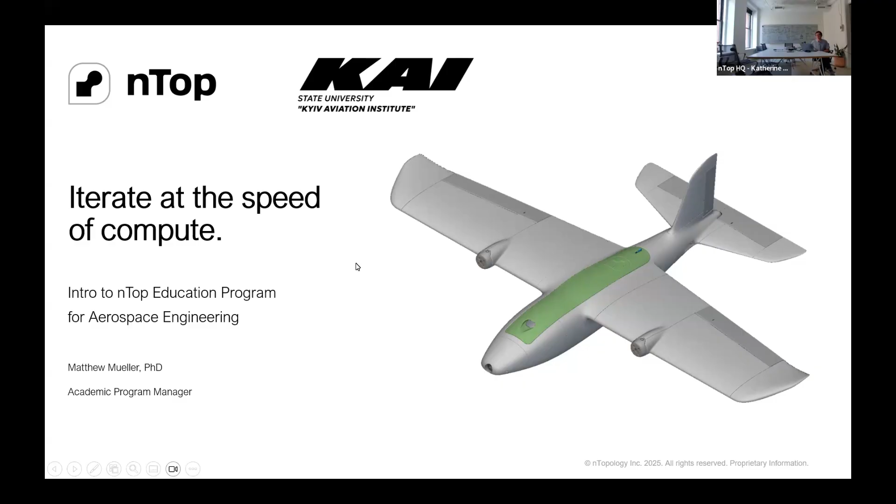I'll start by giving a general overview of nTop, our company, and what problems we're solving. Then I'll dive into technology differentiators, looking back a bit at the state of the art for the CAD industry today, and dive into some use cases. We'll go through conceptual design, multidisciplinary analysis and optimization, and inverse design, then hone in on detailed design and talk about our flow analysis capabilities. We'll end by talking about our integrations, how we fit into the broader spectrum of other CAD tools and computer-aided engineering tools. Again, lots of time for questions.

So who are we and what problems do we solve? In general, we're seeing that the aerospace industry is being pressured to innovate faster, at the same time as the requirements for their designs are getting stricter and more intense. From an education perspective, students need to keep up to be able to get these jobs and join industry immediately. What we're hearing from customers is programs that used to be 5+ years are being condensed into 18 months, and we're seeing a similar trend across the industry.

I picked out a couple of recent quotes just about the high stakes aerospace and defense environment and how speed is really imperative, especially with increasing amounts of competition and fast changing needs, as you very well know, in Ukraine. Of course, technology is changing this. There are new AI technologies and modernizing systems that are helping to drive this accelerating pace of change.

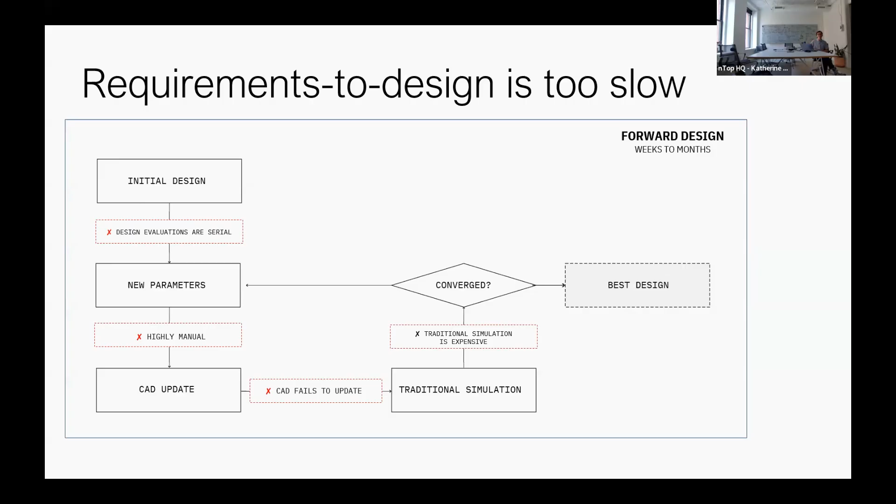Then traditional simulation is very expensive, both computationally expensive and just in terms of the amount of time it takes. It's all a very long, arduous process. So that's one of the key things that nTop is trying to solve in the industry.

The two key bottlenecks that we've identified in terms of design challenges, particularly for advanced aircraft design, are geometry and simulation. Traditional parametric updates are slow and often break your geometry, causing you to go back, and your automation process just can't run efficiently if you're spending so much time fixing broken geometry. Then, of course, with simulation, each time you make that geometry update, it's a very arduous process preparing the geometry for analysis and meshing, making sure all of the parts of your geometry are correctly labeled and differentiated.

So our goal is to help make higher fidelity models for both geometry and simulation, and do them in a more robust way and faster.

So who is nTop? We were founded about 10 years ago, and our goal is to remove barriers to optimization, lower the cost of revision, and increase the speed of your iterations. You can see logos of just some of our customers, and the aerospace industry is definitely one of our key industries here. All of the aerospace primes in the US are nTop customers, and we're constantly working to increase their usage and help them leverage nTop across their design cycles. Generally, we're used for highly engineered designs where iteration is key.

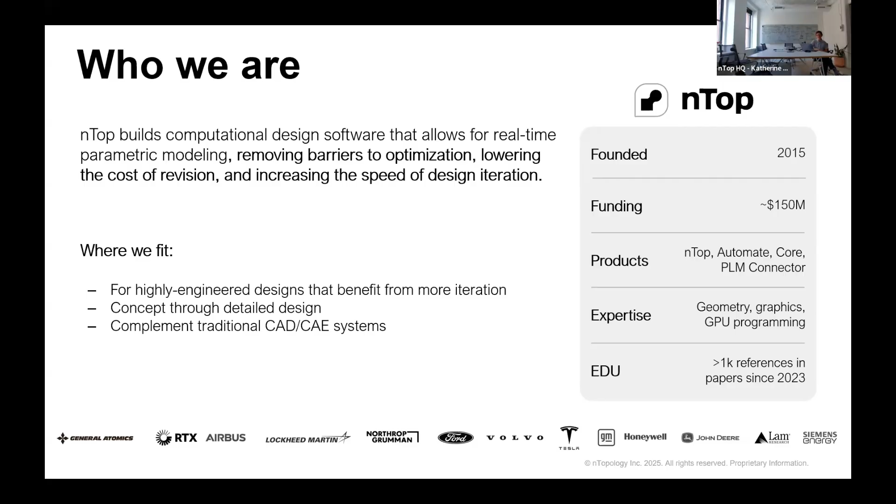And we fit from conceptual design at the earliest stages all the way through to detailed design, topology optimization. We're really meant to complement existing or traditional CAD and CAE systems. We're not going to replace all of your tools and be your full end-to-end solution, but we really augment your capabilities across your design space.

In terms of the education mission, we have thousands of monthly active users using our free education license. Why do we give away free licenses for education users? Two of our main goals here: one is to pay it forward, it's the right thing to do. We want to help the next generation of students and researchers learn with the best, most modern, advanced engineering software tools. So that's why we want to give it away for free.

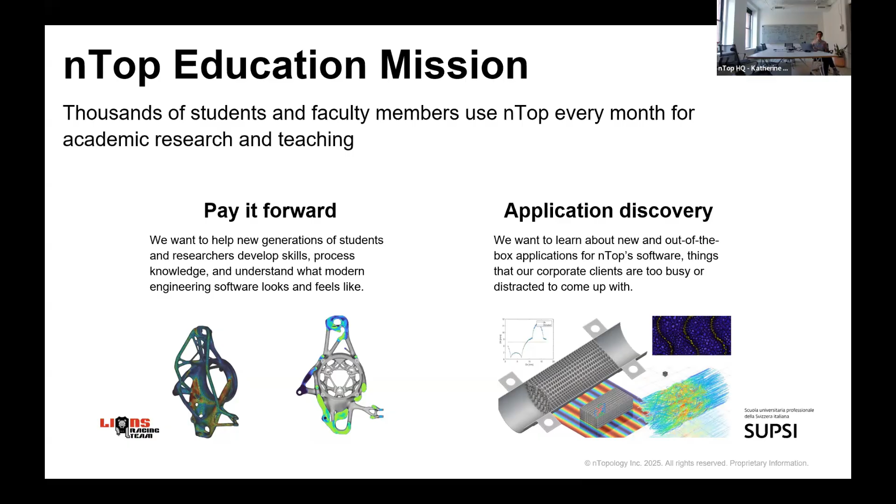But it also helps with application discovery. A lot of our corporate clients are too busy or bogged down in too many mission or business critical requirements to explore the out-of-the-box application. So we've seen a lot of really exciting stuff coming out of academia that helps us make a better product and helps our customers understand what they can do with nTop. Of course, this also cultivates that kind of business pipeline for us. We want students to go into industry and bring these skills using nTop and say you should buy more licenses. But really, we want to pay it forward and help accelerate application discovery.

So as mentioned, we provide free academic licenses. You could go to ntop.com/education, fill out the form. We process the license requests every day, Monday to Friday. Then we also have a full learning website, learn.ntop.com, with self-paced courses that you can take. We have support.ntop.com with lots of knowledge articles, frequently asked questions to help you get started. And then we also have a Discord server for our education community with over 1,000 members and growing strong every week, where the community engages with each other, shares cool updates, research, but also asks questions and gets help there.

So that's nTop. Now let's dive a little bit into our technology, and specifically focus on implicit modeling and computational design. So we have three main pillars of our technology differentiators.

Implicit modeling, which is a new approach to creating geometry that's different from traditional boundary representation, which is kind of the status quo for traditional CAD. It provides fast and reliable modeling, and you can use flexible field-driven parameterizations to create your geometry. And importantly, it leverages modern compute hardware. So traditional CAD is locked to the CPU, which is a serial, computationally expensive, slow process, but implicit modeling really leverages the GPU and multiprocessing.

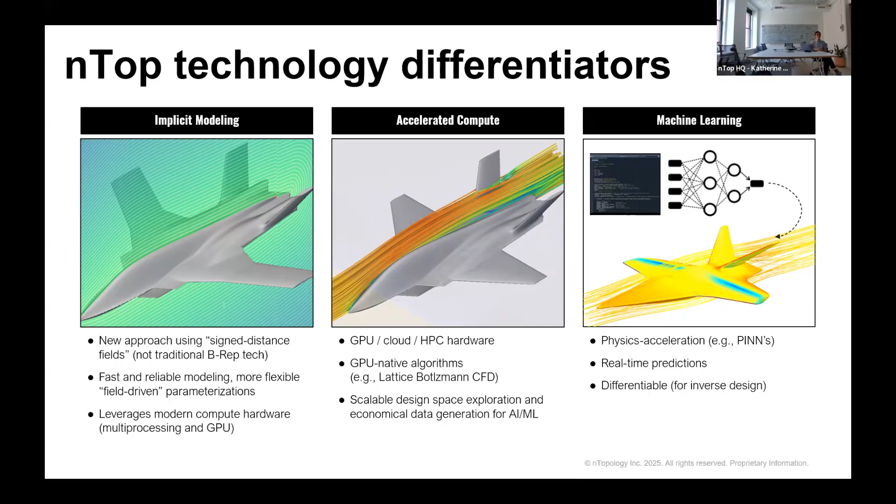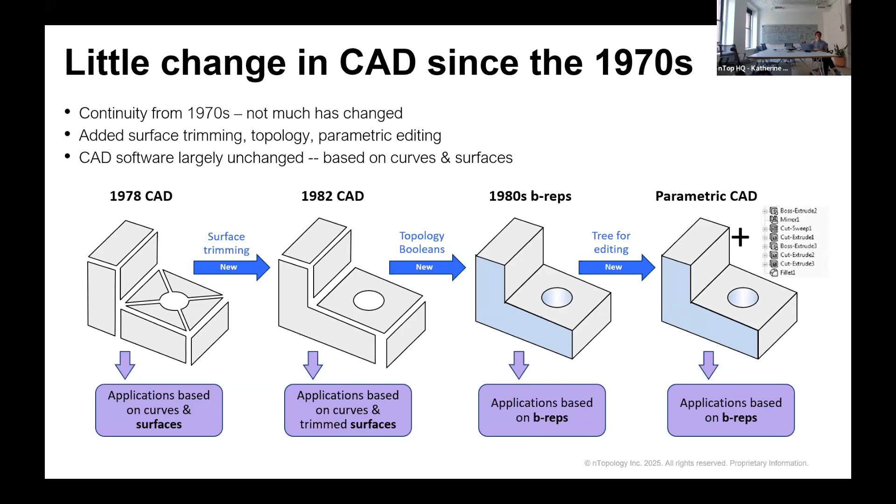So let's take a look back a little bit at the CAD industry and why implicit modeling is so revolutionary and important today. So from the 1970s, when the initial CAD ideas came out of MIT, little has changed. They've evolved, and we've gotten to kind of the traditional parametric feature-based CAD systems that we know and love today. And it's constantly evolving and growing, but it's pretty similar core technology to what we had in the 70s.

And some of the key weaknesses: one is that it's fragile and unreliable. So as I mentioned, if your fillet intersects and the number of edges changes, if your fillet's too big, you typically need to do some manual intervention to solve that, which is, if you're trying to do a design of experiments, a very manual, tedious process.

The data itself is very big with poor scalability. Each edge needs a precise definition, each surface needs a precise definition. So there's NURBs everywhere. And as I mentioned, it's just kind of based on old compute hardware and slow. It's not GPU friendly to have to compute every individual edge and face of geometry.

Implicit modeling, on the other hand, is creating geometry just with mathematical equations. There's no fragile calculations that you need to do. Your topological modifications just work with the math. The data size is very small because we're using a concept of signed distance fields to actually define your geometry.

Rather than defining your edges and faces, we just evaluate your mathematical expression at x, y, z. If the value is negative, that's geometry. If it's positive, that's not geometry. But those fields can be flexibly used in many other ways, so it's a very scalable and efficient way of defining our geometry.

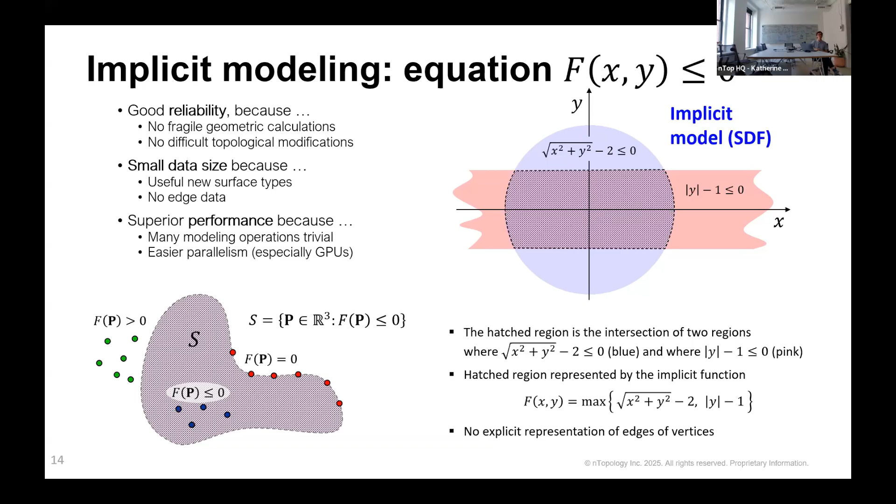So why do we need something new? What parts of these kind of industry-wide transformations are driving this need? The first is digital manufacturing. Additive manufacturing technologies have come a long way, which makes complex parts much more desired and easier to manufacture.

So as your part complexity grows, as your lattices get more complicated, it's hard to scale that on traditional CAD systems, which means more chance for geometry errors, more scalability problems. This also allows us to manufacture with non-uniform materials with either lattice infills or multi-material type applications. And BREP alone is not sufficient for defining those types of non-uniform material properties.

Computational design and just the algorithms on how we are designing are always improving, and it's program-driven, not human-driven. So we can now encode your conceptual models with your implicit modeling technology. And again, back to that computing hardware, we've come a long way since the CPUs of the 1980s, and implicit modeling is really the way to leverage that.

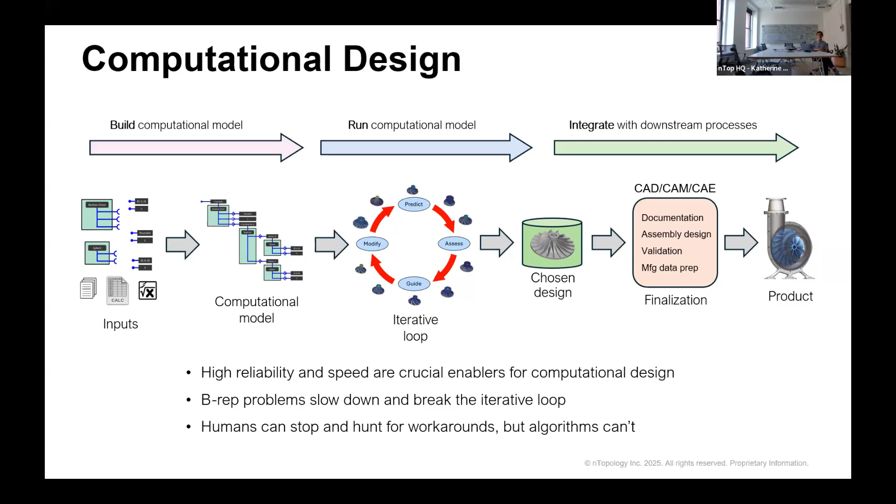So diving into our first real use case for aerospace engineering in particular is conceptual design. Maybe I'll come up for air quickly, look in the chat. Any questions or anything so far?

Yes, Vadim. Yeah, Matthew, I have a question regarding implicit modeling. Can you just explain? You mentioned that you define the mathematical equations that are not actually defining the border, but defining the field where the geometry is inside. But what about the complex boundaries? Do you still use splines or other ways to define this geometry? What is the process of that? Can you comment on that?

Yeah, so the edge of your implicit model is the zero plane of your signed distance field. So this is maybe a reason to just quickly come in and introduce nTop, the product.

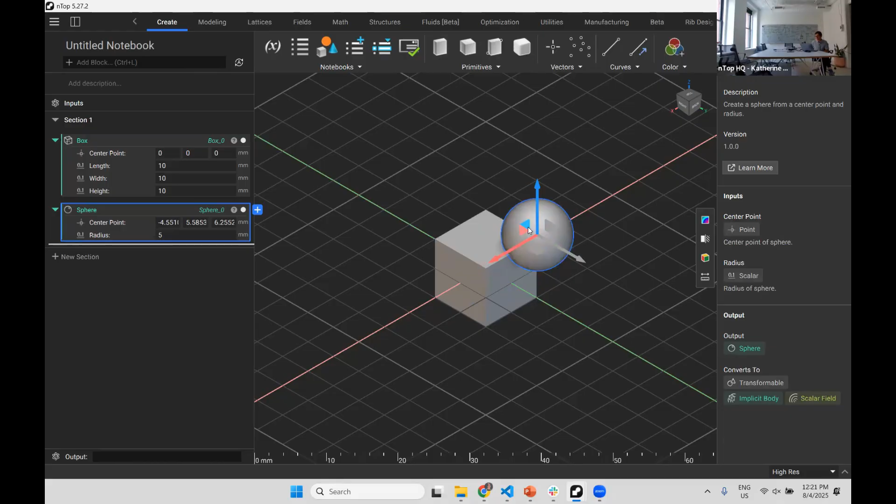So this is what an nTop notebook looks like when you start a new model. You can add a primitive. So I'll add a box and I'll add a sphere. One of our favorite models is the sphere cube. So here we can click on the box, we can click on F, which is your field viewer, then I can turn off the visibility.

And here we can see the signed distance field that the box generates. Inside of the box is your negative, and outside of the box is positive. So it's that zero plane which defines your geometry.

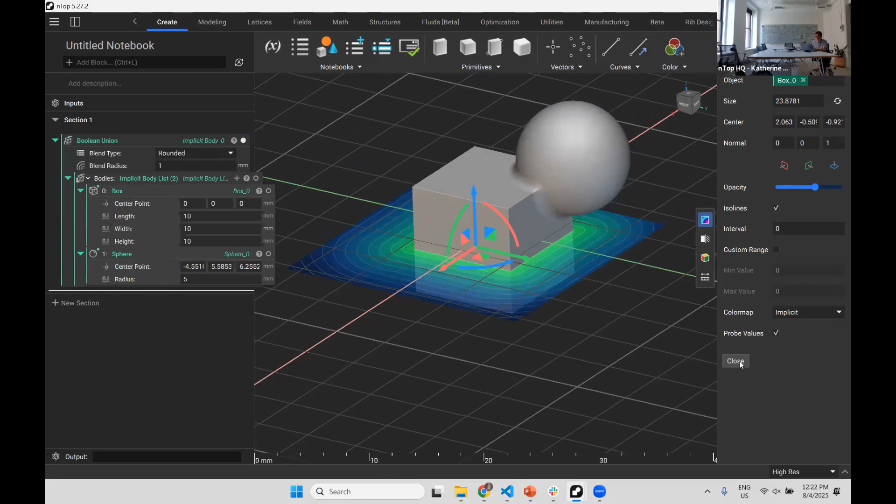Just to go a little bit further here, maybe I'll do a Boolean union and put these two bodies together. And maybe I'll add a blend radius there. Blend radii are very powerful. And here you can see we now have an updated signed distance field, which if I hide this again, that zero plane of our signed distance field is what defines our geometry.

You can use splines and various curves to help define your geometry, and those splines are driven by their equations.

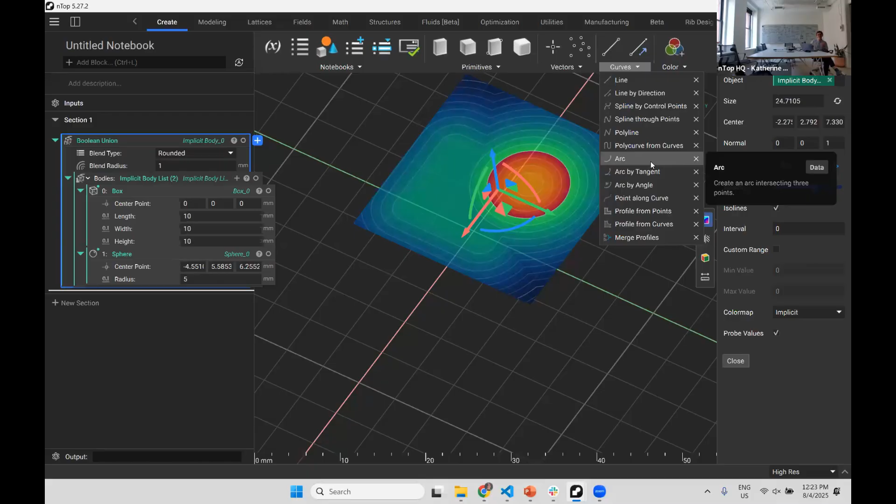But if you're creating just an implicit body, we don't necessarily have a curve that defines the intersection of where this fillet radius changes, if that makes sense. At the end, I'll talk about how you can then convert your implicit body to a BREP body for integration with your CAD systems. But that is sometimes one of the difficult parts, going from an implicit body to a CAD body.

Yeah, Matthew, thank you. This makes sense. Yeah, thanks. Of course. And I'll come back and do some more demos later on. Any other questions before I keep going? Okay, I'll take silence as a good sign.

So conceptual design is one of the main use cases that nTop is really targeting now for many reasons. One is because the further in your design process you go before you realize that you're not actually on an optimal design path, the greater the costs of revision. So if we can help companies and product designers converge on that optimal solution as early as possible in their conceptual design phase, we can help save a lot of money for revisions down the road as they've gotten farther along in their detailed design process.

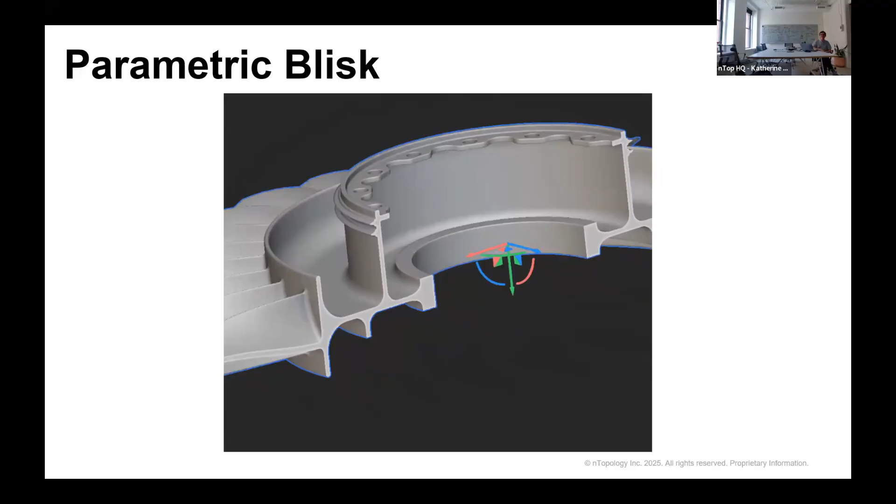This parameterized blisk, you can see, no other CAD system. You can see these updates in real time as you're dragging a slider. And I can demo this file later, but as you can see, all of these parameters using our GPU acceleration, you can see the updates in real time. They're super robust. So you could do that design space exploration in an automated way without worrying your geometry is going to break at some point.

Similarly, with fuselages for aircraft, you can use these equation-driven methods and parameterization techniques to explore all of your design space early on to make sure that you're choosing the optimal design before you get into the detail parts.

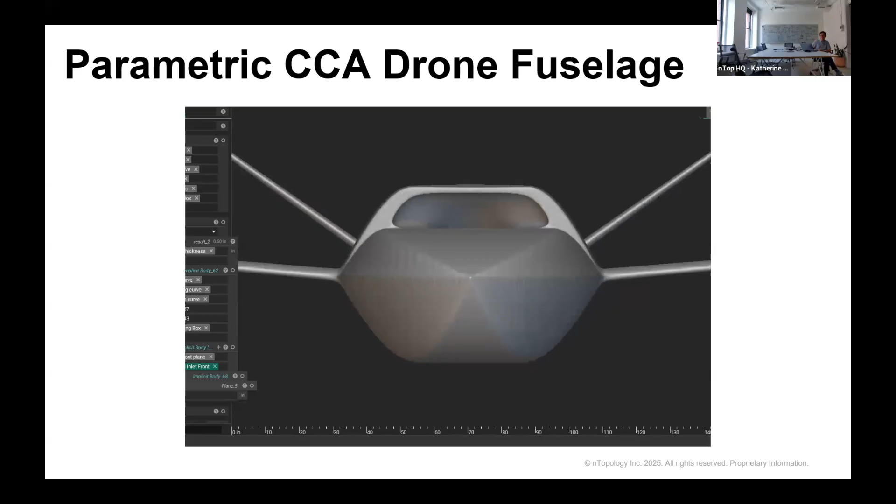Matthew, may I ask you, when I make some transformation due to the sliding, what main characteristics are taken into account? For example, it could be aerodynamic, it could be strength, or it will be a combination of both of them. So how may I determine what I need for transformation as a key parameter?

Yeah, so it all depends on how you set up your model. These are the parameters that control the geometry, but your analysis and your requirements that are driving your design can be baked into it in any number of ways. So you can write your equations in the notebook on the left. So one thing I like to say is, don't think of the notebook on the left like a parametric feature tree, as you would see in a traditional CAD system. Think of it like a Python notebook, like a Jupyter notebook. You can have all of your equations baked in here, and it's a functional programming language. So you can refer and use different aspects of your notebook at any point above or below. The order doesn't matter.

So if you have your lift to drag nominal equation encoded in your notebook, you can use that to drive the ratio of your wingspan to your fuselage blend. I'm making stuff up, I'm not an aerospace engineer, but that's an example of how you can build that kind of nominal physics-driven analysis into your notebook.

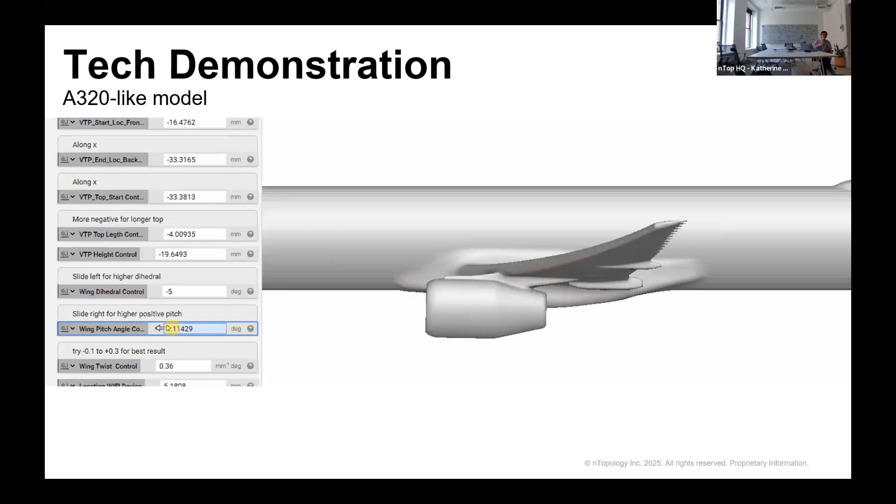Of course, you can also run stress analyses, flow analyses on your geometry. And then in terms of closing the loop and doing that optimization, that's a very specific kind of problem and depends on your specifics. We're actively working on integrating more optimization algorithms into nTop, so you'll be able to do all of those types of workflows directly in your notebook. Currently, we have field-driven optimization or topology optimization built in, but we're moving towards more multidisciplinary optimization type problems where you have that trade-off between stress and lift, for example.

So these examples are really just showing the robustness of our implicit modeling technology. With a full A320-like model, you can see how easy it is to explore all of these different shapes using those field-driven modeling capabilities. Okay, thank you.

Yeah, Vadim? Yeah, Matthew, if I understand correctly, those sliders are user-defined, right? So the user can create these sliders for their model, and in that case, what computational engine is in use? Do you have an API for Python, or do I have to define all these equations inside nTop? Yeah, great question. The parameters are defined in your notebook, so you need to come up with your own mathematical equations to define the geometry. We're working on other, more computational interfaces for generating the notebooks themselves, but as of today, you have to define that in the notebook.

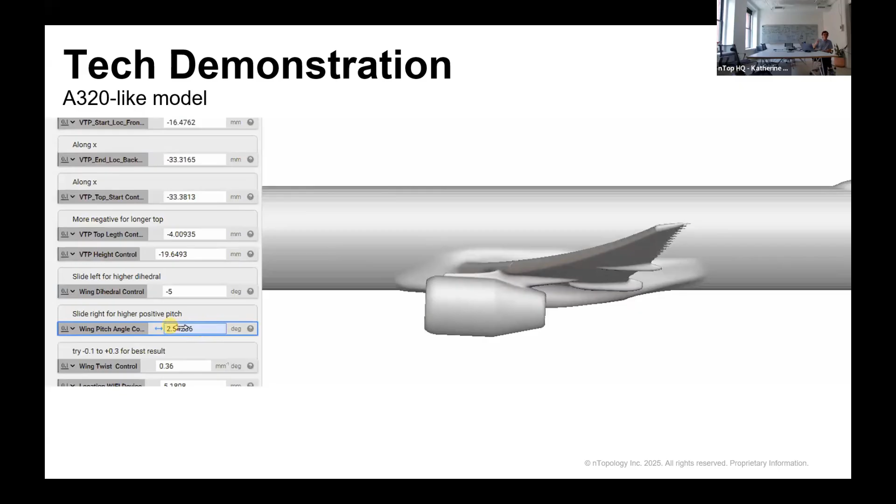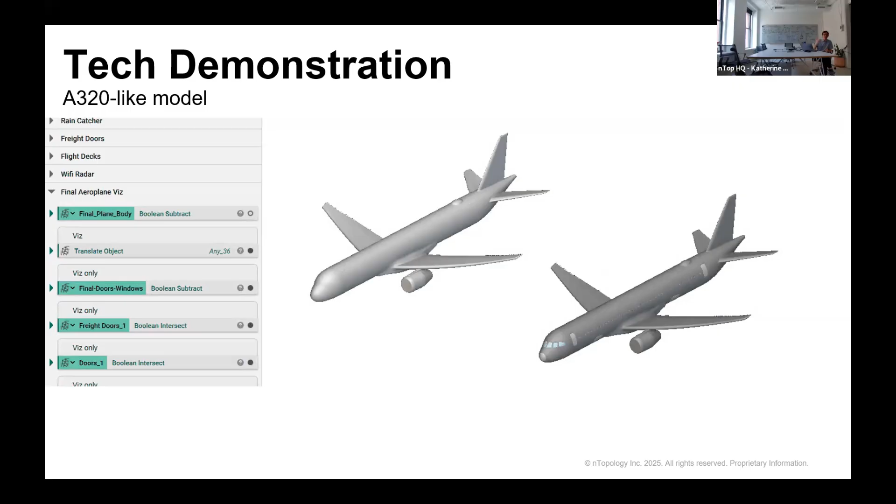Once you have your notebook defined, however, we have a command line interface that allows you to iterate over your design process and generate lots of data very quickly as you do your optimization. You can run that command line interface through Python or MATLAB or any scripting environment. We have a Linux option as well, where you specify your inputs, and whatever the notebook does, you use as an output. That allows you to do your design of experiments, explore the design space and converge on an optimal design.

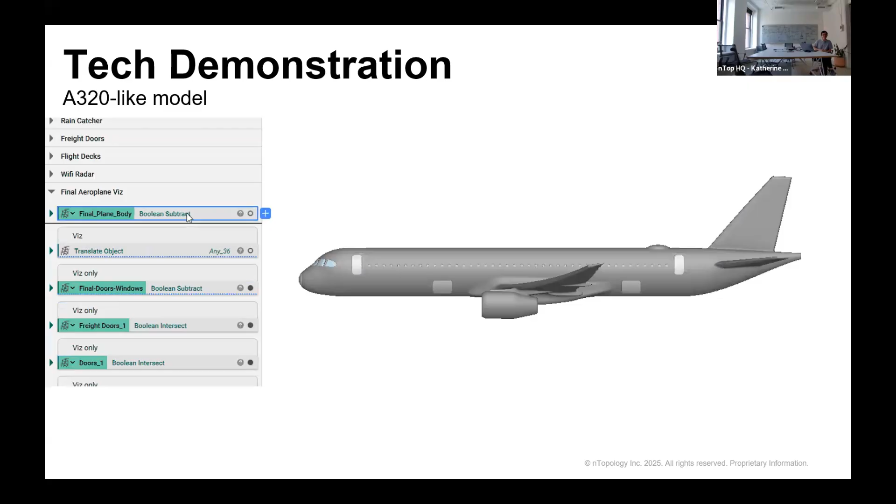But yes, today the user defines the geometry, the inputs and the parameterization of that geometry in the notebook itself. So your notebook supports some kind of programming language, right? I can write these equations in a programming style? Yes, that's the application itself. We don't currently expose access to the modeling kernel at that lower level, so the block-based interface is the UI. Okay, I see. Again, we're exploring ways of doing that, but that's longer term. Yeah, I understand. Thank you.

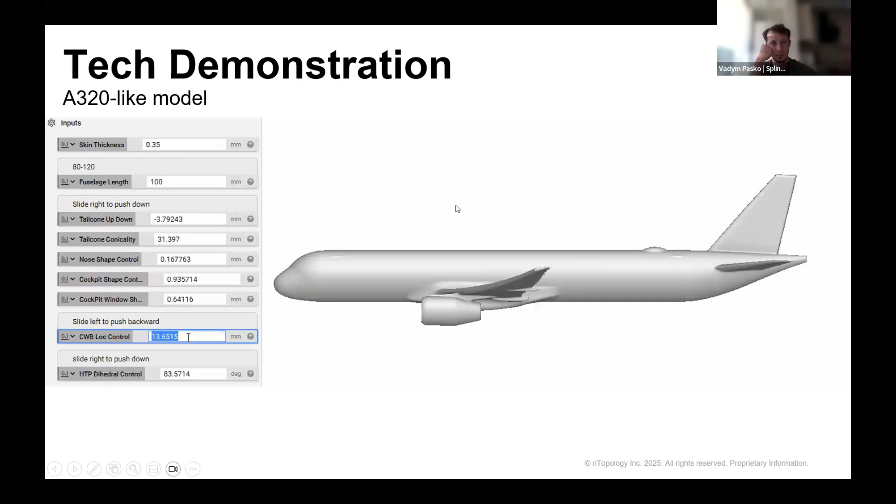Cool. So that's the conceptual design application, and what we see is it driving a lot of value for our aerospace and defense customers, giving them a better probability of winning contracts in the first place, and a more optimal design as early in the process as possible. So this is maybe going into your question, Vadim, focusing on multidisciplinary analysis and optimization and inverse design applications. nTop Automate is that product, the command line interface.

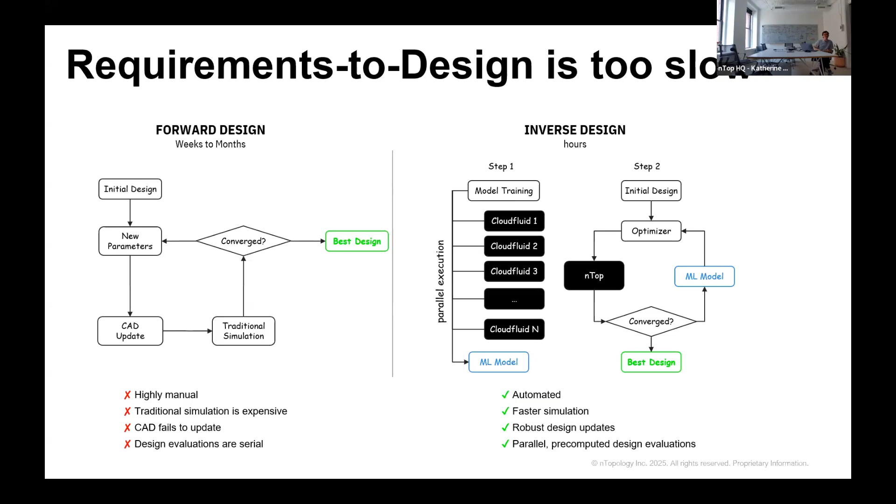Back to that initial problem I mentioned: requirements to design is too slow. It's highly manual, traditional simulations are expensive, CAD is not very robust, and each evaluation is serial. So the methodology nTop is promoting is inverse design. Rather than just a loop like that, the first step is to create your geometry model, and then you can train a physics surrogate model using your nTop model. Cloudfluid is our core CFD technology in nTop, and you can run your design of experiments, generating lots of CFD data across your specific design space to generate an ML model.

Then you can use that surrogate physics model to do your inverse design, your optimization based on specified constraints and optimization goals, so you can very quickly converge on the best design. This is a much more robust method than generic physics-informed neural networks, because the machine learning model is trained on your specific design space. Your specific parameters of interest are used as input data for your machine learning model.

For an aircraft, for example, there are some generic AI-trained physics models for external aerodynamics out there, but it's almost definitely not trained on the specific configuration of the aircraft you are designing. So you can use your nTop model to generate the data across that design space, so that you can do that inverse design and know that your results are trained specifically on your design space.

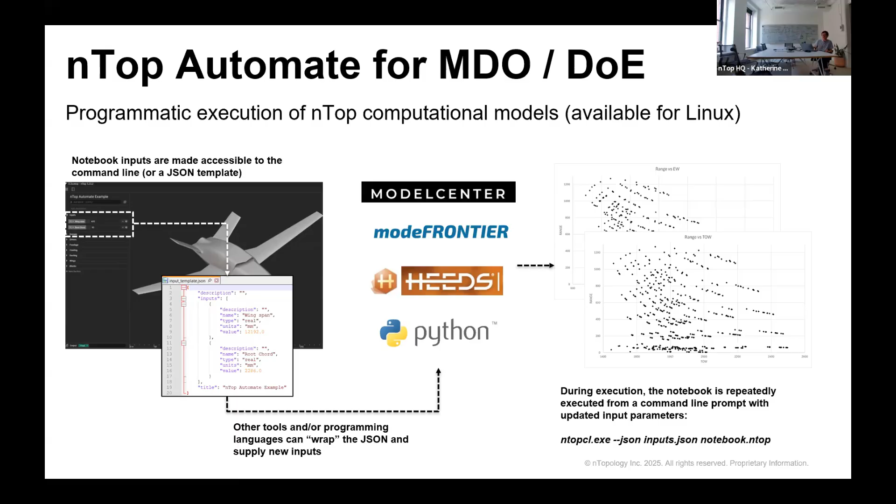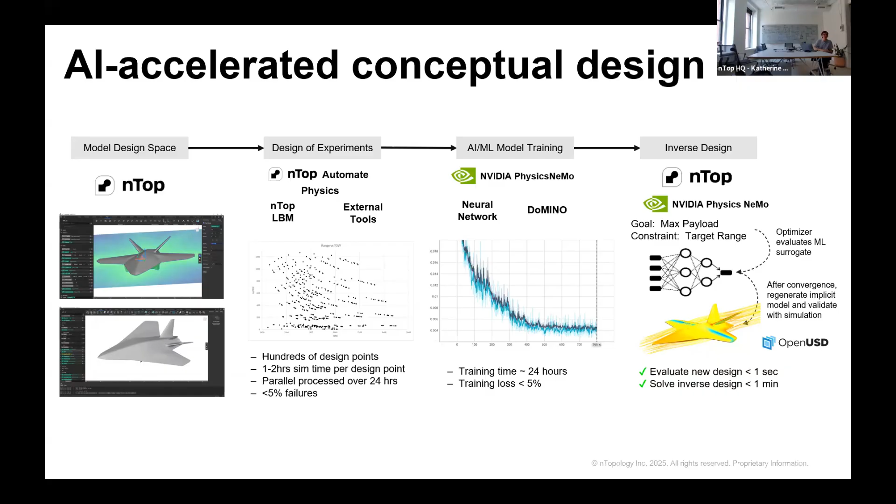As mentioned, we're heavily investing and exploring the AI accelerated conceptual design path. So once you have your model design space built in nTop, you could do that design of experiments and use it to train your AI ML model. So we've been collaborating with NVIDIA on this and been able to quantify the value of their approaches and quantify the fidelity of their approaches.

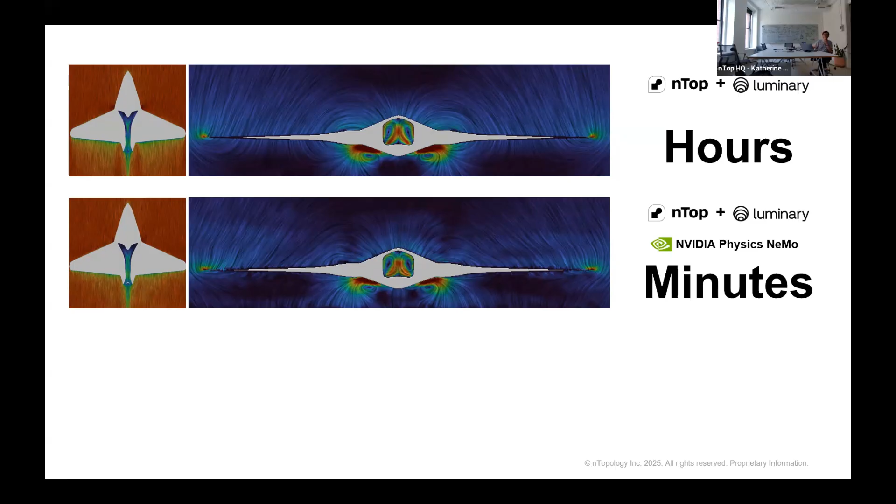So you could see with nTop and Luminary Cloud, which is one of our partners that does computational fluid dynamics for external aero, each simulation run takes hours. But if we generate lots of data across our design space in an automated way that's very robust, and then use NVIDIA to train that physics informed network, each analysis goes from hours to minutes. And you can see there's a less than 5% delta comparing the full physics CFD to the AI informed CFD, showing that the fidelity of these models is robust and reliable because it was trained on your specific design space.

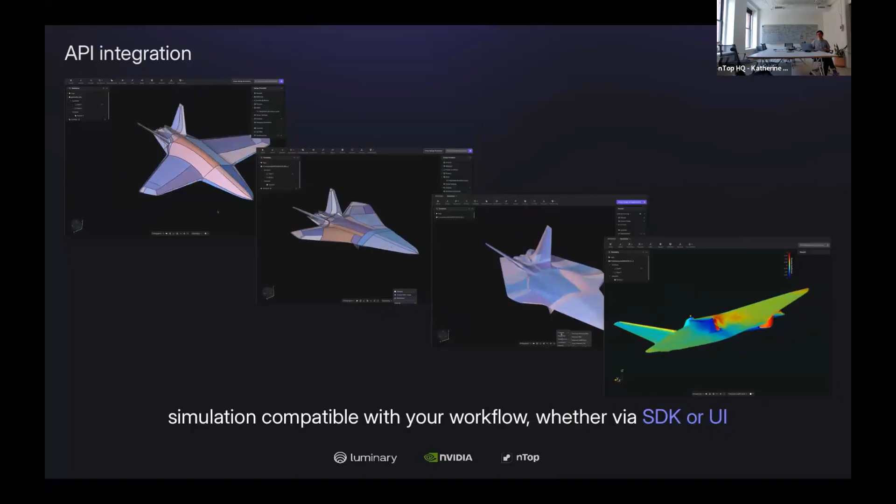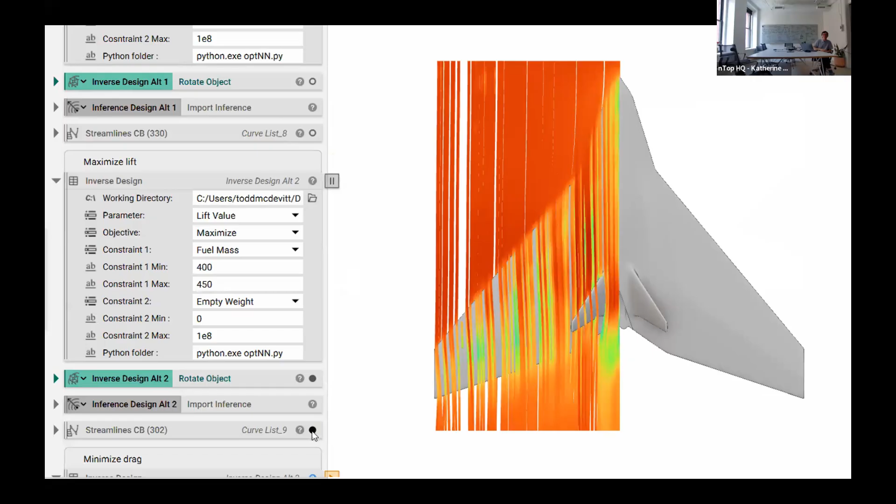As mentioned, we have API integrations that allow you to automate this in lots of different ways. And then this is an early demo, but shows what that inverse design approach could look like if you plug your trained neural network back into an nTop notebook. So in each of these cases, here we're trying to do an inverse design and maximize the lift of our parameterized aircraft. And we can see the geometry that's generated as well as the predictions for the CFD based from that neural network.

So it's very quick. You could see for minimizing drag, that new configuration, and each of these optimization algorithms are being generated on that neural network trained with data from nTop. So again, you can do this today, but it's a very involved process. We're working on making this more of a plug and play kind of thing, so it's easier for any customer to implement themselves.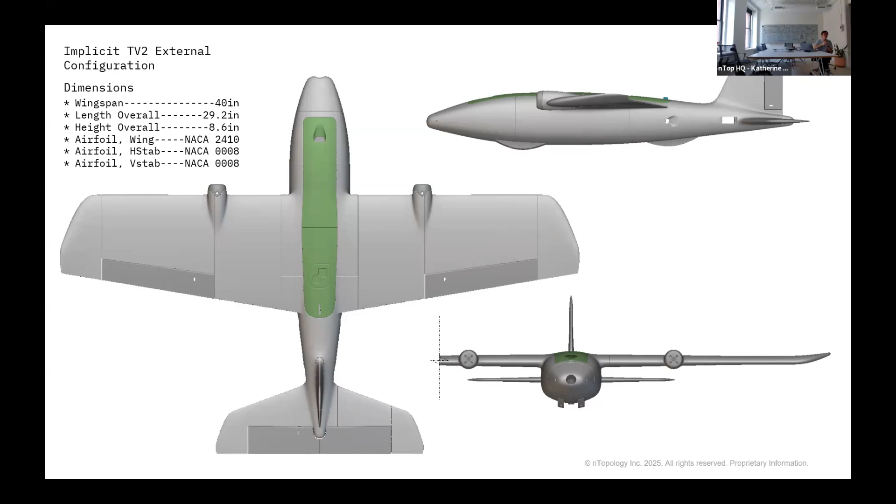So typically, because we don't have the types of splines and specific referenceable surfaces that are required for detailed design and engineering drawings, users don't go into this level of detail on their design. But because this was entirely 3D printed, we didn't need an engineering drawing. We could do the full detailed design all in nTop. So he took this concept that was optimized in nTop and then broke it down into a full 3D printable design down to every little component, including a little spring latch that closes down on the electronics bay.

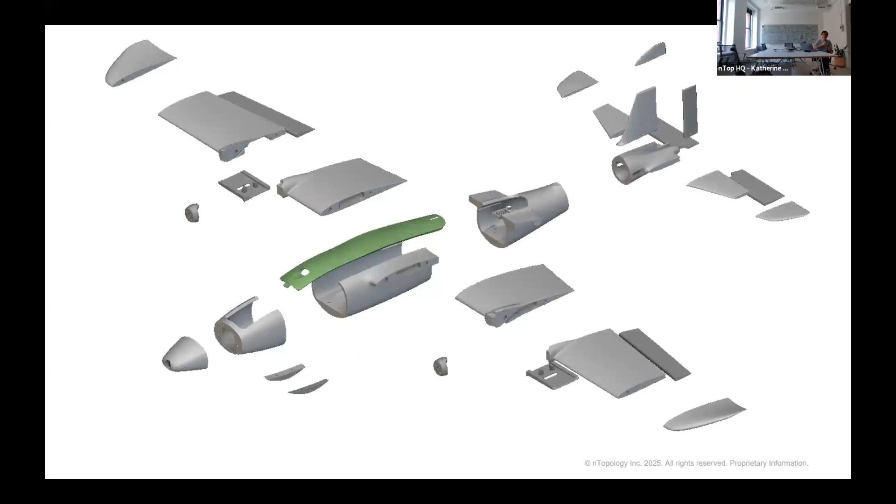So you can do this level of detailed design in nTop as well, although it gets increasingly complicated for this type of parametric design. The more typical use case that we see is something like topology optimization. So you can define your boundary conditions directly in nTop. So these are all native blocks in nTop.

I see some questions came in on the chat, so I'm just going to take a second. Can I use my existing CAD model? So yes, you are able to import CAD models into nTop. You can convert those CAD models into implicit bodies and do your topology optimization on those imported models. I'm not exactly sure what the time savings would be. Obviously, the topology optimization algorithm leverages your system spec. So the more RAM you have, the better the performance will be. But I will say that our topology optimization interface and algorithms are first rate and as good as it gets.

And I'll show you soon the way that you could use the data that nTop has for field-driven design is an extra powerful part of implicit modeling that we don't see any of our competitors really having. So once you define your boundary conditions, you can also define your payload positions. So this is a very simple nominal example, but you can have your kind of holdouts for avionics or fuel or any other systems you need in your aircraft.

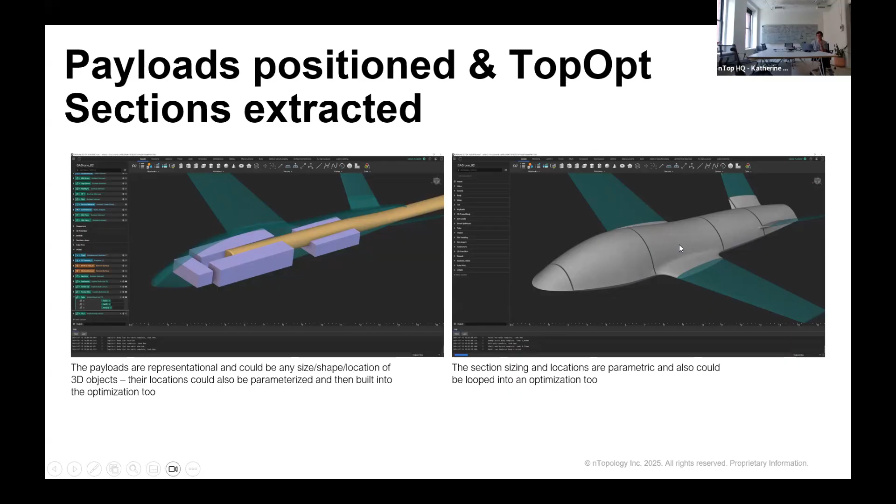You can break down your design into discrete sections, so it can be printed, for example. And then you can go in and do your topology optimization on each of these segments using those payload requirements as inputs, or as constraints for your topology optimization, to make sure everything fits as you want it to. So that's a perfect example of how you might leverage a CAD model for input to your topology optimization in nTop.

So a workflow might be you do your conceptual design in nTop, converge on your optimal outer mold line for your aircraft. Then you go into CAD, do some of your detailed design based on that optimal outer mold line. And then you come back to nTop to do your topology optimization, kind of your final detailed design from your CAD parts. Of course, you can do your stress analysis directly on your topology optimization solution to see the stress concentrations and understand whether it fits your requirements as set up.

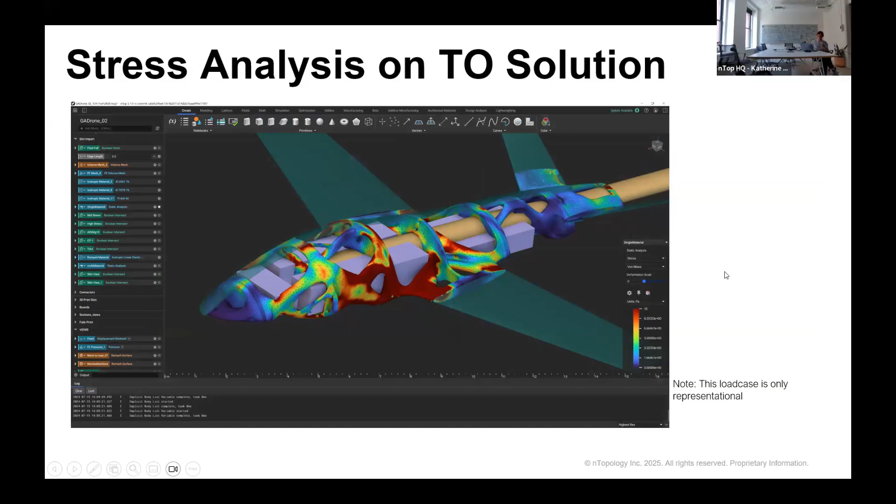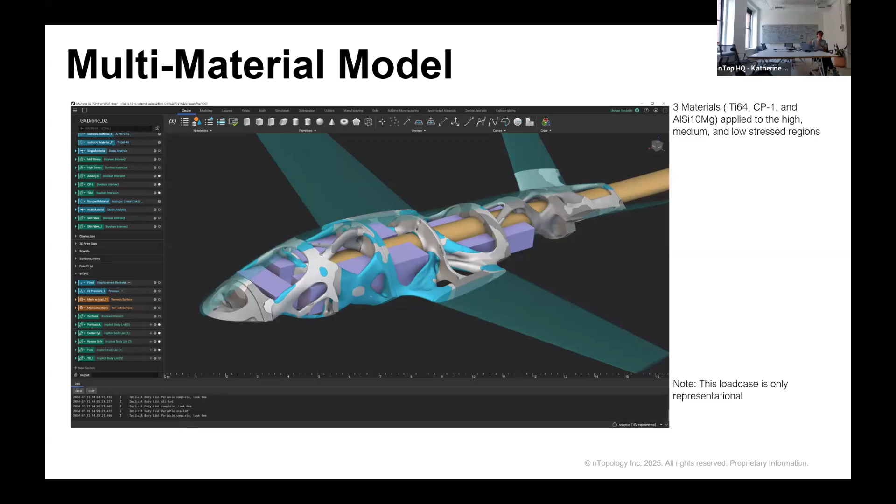And then here's the field-driven design part. You could actually use the outputs of your stress analysis to specify some other field-driven parameters in your design. So in this case, we're specifying a multi-material model based on the results of our stress analysis. So at the higher stress locations, we're going to specify a stronger material, and at the lower stress locations, we're going to specify a lighter weight or cheaper material, for example. And we're using the field of that simulation result to drive this multi-material placement.

So you can see even on the inner parts of our geometry, we have those materials defined. So for multi-material 3D printing application, this is ready to go. So super powerful using the outputs of your simulation results as the fields that drive your geometry. You could do that same thing with your shell and infill structure. So nTop is really good at generating lattices because that implicit geometry is very efficient. So if you wanted to generate this type of lattice in a BREP CAD system, good luck. But nTop does it very efficiently.

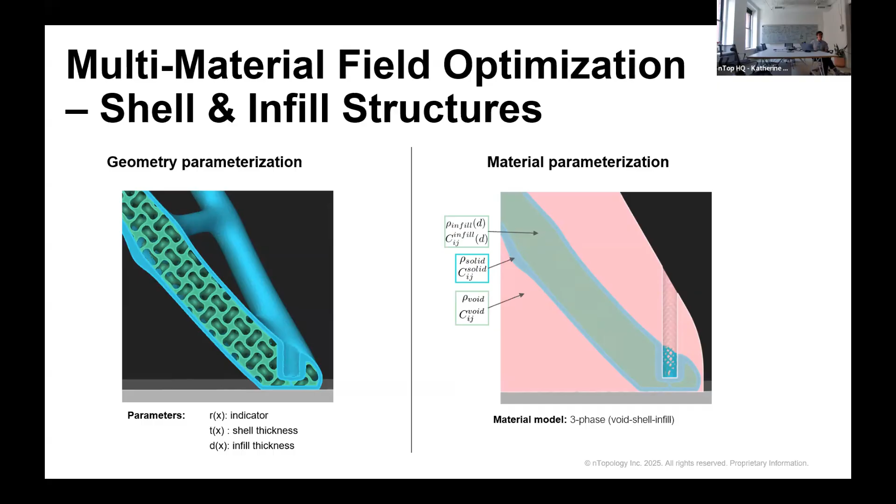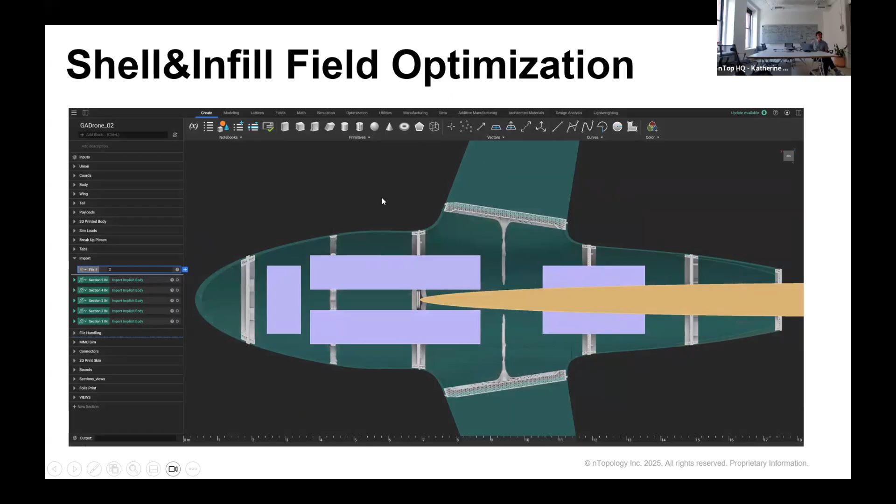And you can, again, drive the shell and infill structures with your field results or run an optimization algorithm specifically on that field to optimize for your constraints and requirements. So you can see here, we ran the shell and infill field optimization to make sure that the thickness of the lattice on the inside is optimized for our specific constraints and goals for the design. So in this case, we're optimizing the infill thickness based on those simulation results.

Sorry, I saw another question come in. Does nTop have 3D printing software, which I can set parameters for my 3D printer like Ultimaker Cura? So we have integrations with 3D printing partners. Ultimaker Cura is not one of them, but you can use the parameters of your 3D printer, like your extruder nozzle diameter, your layer height, for example, to drive constraints or requirements of your topology optimization algorithm or your field optimization algorithm, or even just your thickness of your lattice that you're generating.

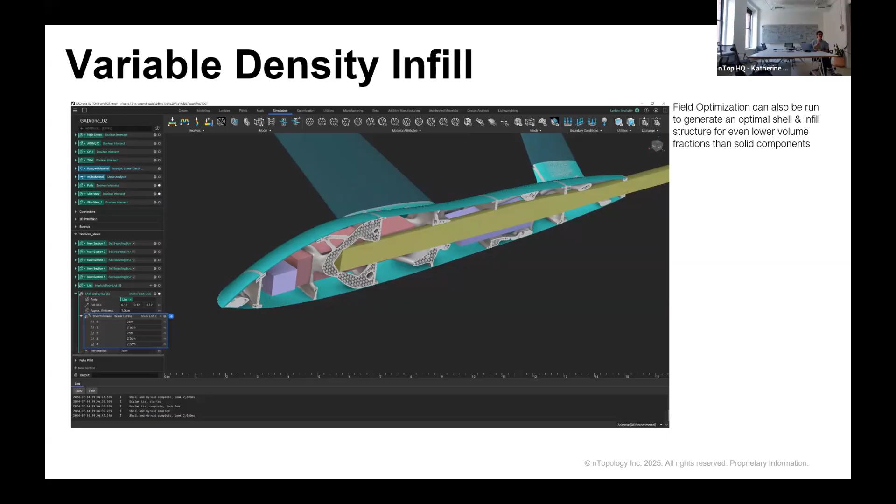So you can parameterize it yourself and do it efficiently, but we don't necessarily have a direct integration with a CAM provider. You can do some slicing capabilities in nTop to analyze your design and make sure that it is optimized for a specific 3D printer, but then the toolpath generation will have to happen separately. And at the end, I'll show one quick example of a 3D printer CAM software that we've partnered with that directly takes our implicit models from nTop.

So in terms of native flow analysis, again, we have stress analysis, modal analysis, buckling, basic thermal analysis, but I also wanted to highlight our native flow analysis. So this is a lattice Boltzmann method solver, which runs on your GPU, so it allows you to really efficiently get some results for your designs.

So again, the goal is to very quickly get to your results with just your implicit model, so you don't need to mesh your full model. The lattice Boltzmann method discretizes the flow domain into voxels, which allows it to run very efficiently on your GPU hardware. Now this is kind of a mesoscale analysis, so it's not necessarily as accurate as a full CFD particle solver, but it is orders of magnitude quicker with similar

fidelity results. I'll say currently it is not tuned for external compressible flow aerodynamics, even though that's the example we're showing here. That's on the roadmap and hopefully should be shipped in the next 2 to 3 months. But currently it's really meant for internal flow, but we're constantly expanding the capabilities and tuning it for new domains.

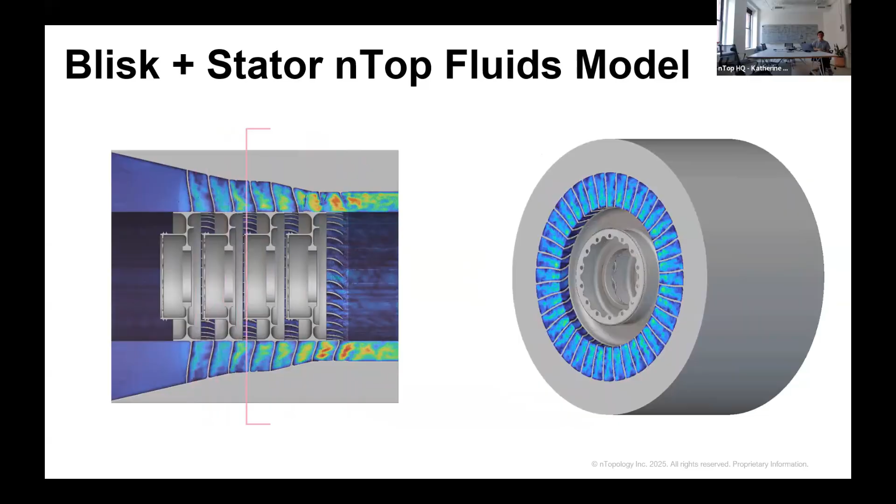This is an example of a full blisk and stator model that has nTop fluids analysis through it. So you can see the level of complexity that it's able to handle and how powerful it really is. You can see heat exchangers are one of our bread and butter use cases because we're very good at generating these highly complex lattice structures.

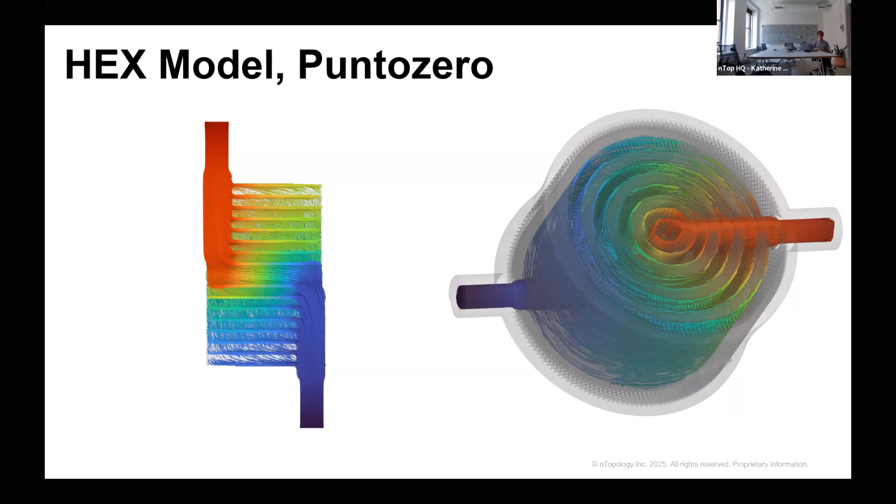And now we have native flow analysis capabilities. So you can do that full closed loop optimization all just with an nTop notebook. You can generate your input designs, run your flow analysis, and optimize for pressure drop or average velocity or anything for your heat exchanger to make sure it meets your use case.

And again, this is showing external flow as a demonstration, even though today it is not tuned for external flow, but it shows how efficient it is for doing your design of experiments analysis all directly in nTop.

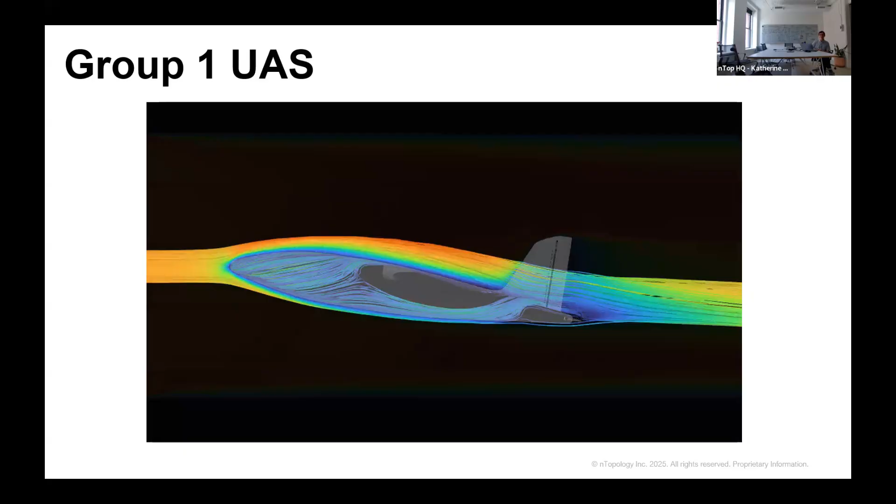And so in terms of integration, you have your implicit model, your concept of outer mold line for an aircraft. How do you then go back to CAD? How do you manufacture or analyze it using ANSYS Fluent or some other system? So we do have the ability to convert your implicit body to a CAD NURBS surface for integration into a traditional B-rep CAD system. Or, of course, we have lots of meshing capabilities, so you can kick the design out to ANSYS Fluent or any other simulation platform for analysis.

So pretty much all of our surfaces are G2 continuous, so very smooth surfaces. At some extraordinary points, there is some G1 continuity. And we're very proud of our meshing algorithms and are always improving upon them to make sure they're watertight and clean and really efficient for the use case.

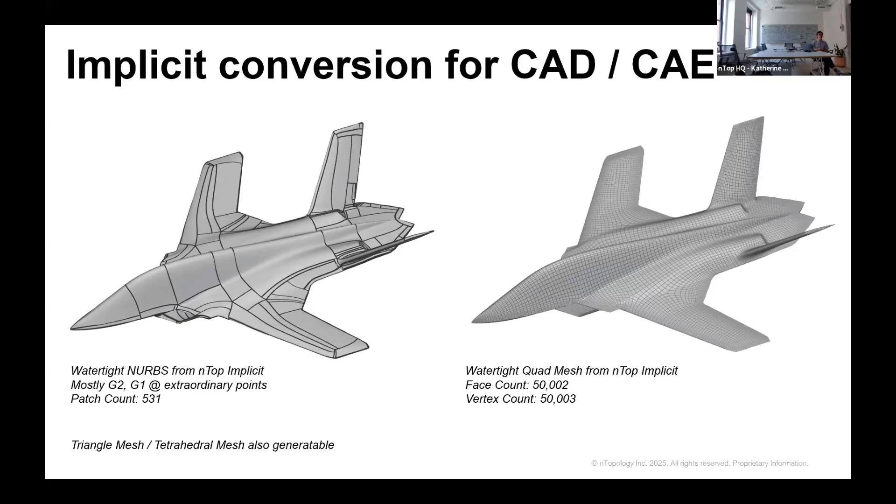So in terms of exporting to NX, a lot of our aerospace customers use NX, but it's similar processes for CATIA or SolidWorks or any other traditional CAD system. You can see how you're exporting those NURBS surfaces and importing them into NX to check your surfaces. If you're then doing your detailed design, maybe you need to reference these surfaces for regenerating your model. But you can see for things like shelling, nTop is very good at that and useful for things like composites layup.

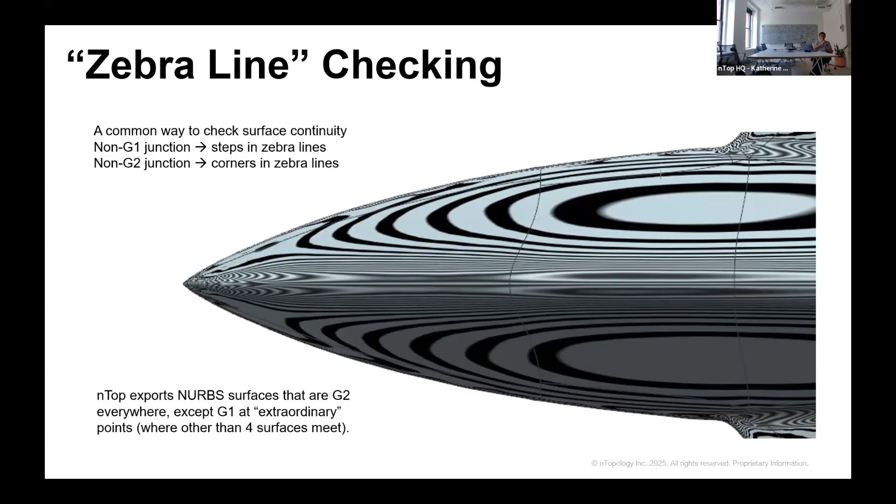Oops. Yes. So in terms of zebra line checking, you can see how smooth the zebra lines are of the NURBS surface. We actually just in the latest release of nTop have native zebra line and metallic surface checking. So you can do that basic surface checking in nTop, but of course it's also important to make sure the NURBS surface we're generating is continuous as well. And you can do all that slope analysis as well.

I think one of the important things to highlight is automatic domain segmentation. One of the key use cases I've come across is users designing a heat exchanger in nTop and then wanting to use ANSYS Fluent for analysis. So you can define your domains for your cold fluid, your hot fluid, your metal interface, all in nTop, so that when you're exporting the mesh, it's smart enough. It has that metadata to know the domain segmentation.

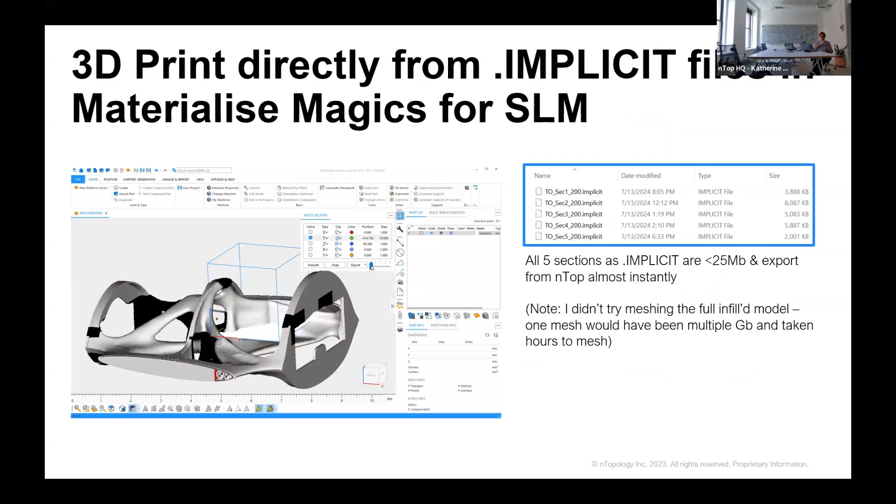And last, I'll just quickly mention this partnership with Materialise Magics. You can directly import your .implicit model from nTop. You don't have to do that meshing or converting to a CAD body beforehand. And more partners are adding support for our implicit modeling geometry. Fusion 360 just added support, so you can directly import a .implicit model from nTop without doing any conversions.

And SimScale, a cloud simulation platform, just added support for implicits for conjugate heat transfer. So we're constantly expanding our network of partners that are leveraging the power of our implicit models.

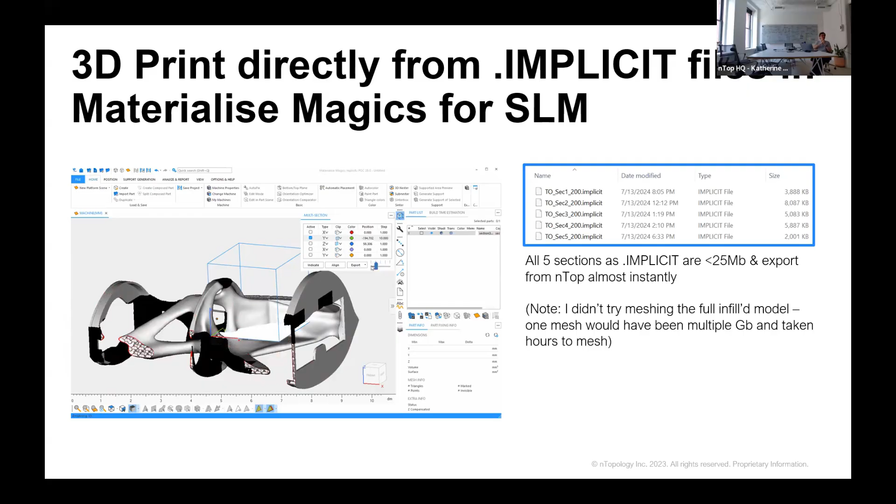And so that's what I have in terms of slides. Hopefully I answered at least most of the high-level questions about what nTop is, where we add value, and what problems we solve. But I'm happy to answer any additional specific questions or go into nTop and do some more demos to help make sure that everything makes sense.

Okay, many thanks, dear Katherine. It was really interesting, and it's a good, wide horizon for new techniques for designing, for understanding the nature of things completely within a small involvement of the forces for the calculation. And maybe, first of all, a question: it looks like a good solution for simplifying and modifying some geometry, some design. But I guess you need to know the basic principle of the design. It's my point of view, because you must understand the nature of your object.

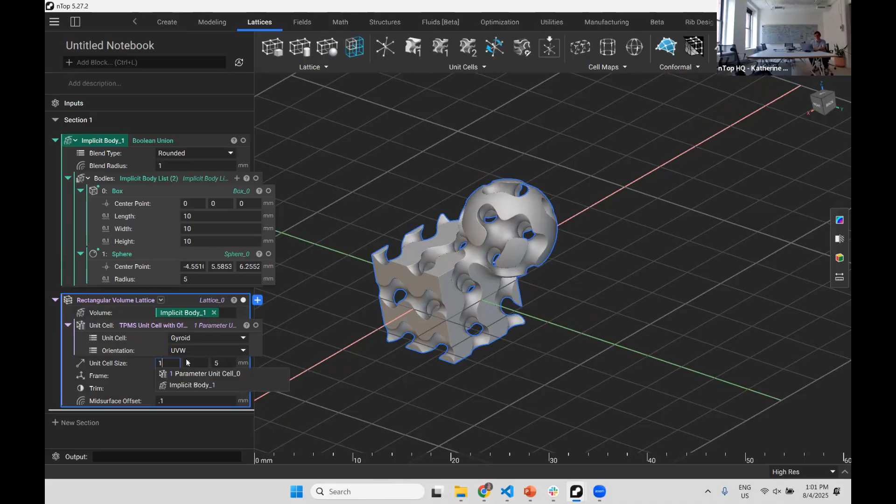Here, maybe I'll just do a simple lattice example. I want to do a rectangular volume lattice, and here I'm going to use my implicit body. I'm going to use, let's say, a gyroid unit cell. I'll specify my cell size. So here's now my gyroid. I can change my unit cell size, see that update. But this implicit body is still here - I can still do anything I want with it.

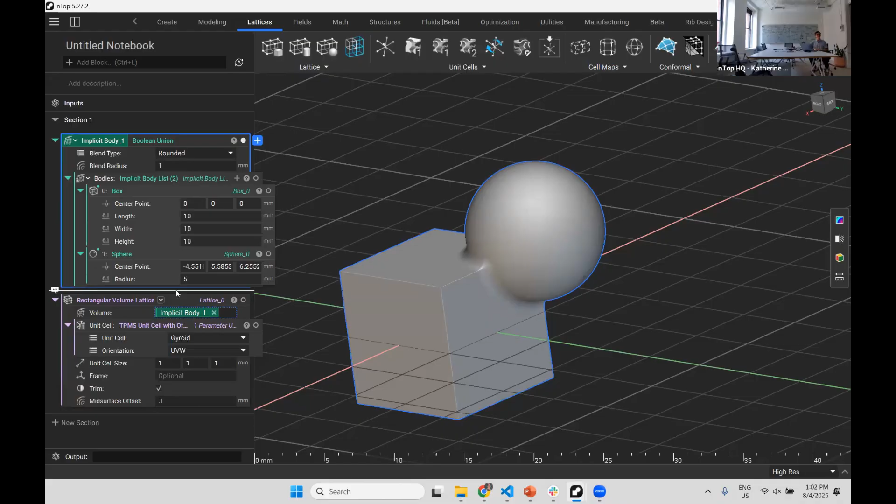In a traditional CAD platform, once you've consumed a feature downstream, you can't always reference it in the same way. So it's a functional programming language - there are some fundamentally different concepts you have to get your mind around, and that's been an interesting process for me to go through. But you can see the fields here that are driving the geometry of the lattice, and that allows you to do very flexible and interesting things.

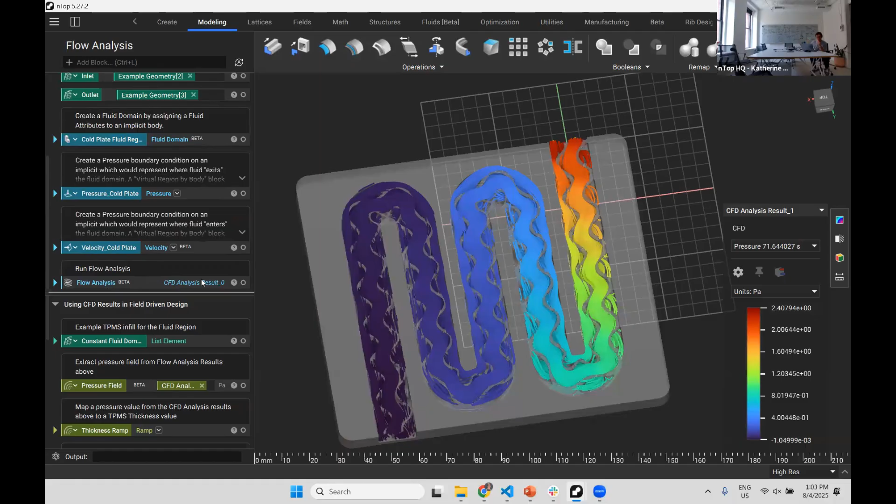So here is an example of a heat exchanger. And you can see we're not just showing the flow analysis, but we're actually using the flow analysis to change the density, the thickness of the lattice across the channel, to optimize it for pressure drop, for example. So we're doing two flow analyses: first, a flow analysis on just the empty channel, and then we use the results of that flow analysis to drive the thickness - we use the pressure field from this flow analysis to drive the thickness of the lattice across the channel.

So to answer your question, it is its own thing. There are obviously transferable skills if you understand 3D parametric CAD, but the way that you model is quite different in nTop compared to parametric CAD. One example here is this very simple aircraft. If I want to change the dihedral, again you see that performance - you can't get that in any other CAD. And it's not only the dihedral, it's the blends that come along with it. That's something that's really difficult to get tuned and robust in a traditional CAD platform.

But the way that we're generating these wings is not with a loft or a sweep of an airfoil along a guide curve. We have to use fields, these implicit fields, to generate the geometry.

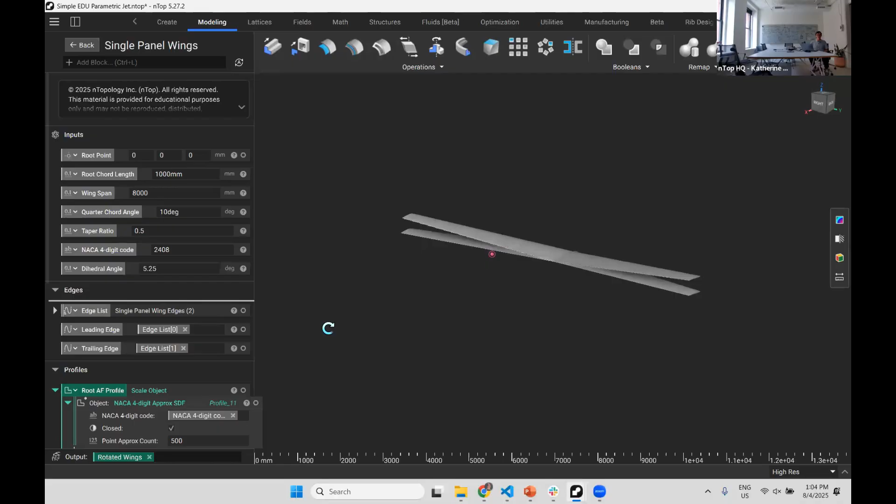So one thing I'll highlight here is our use of custom blocks, as we call them. You can package up an nTop notebook and use it as a single block in another notebook, which allows you to reuse workflows. In this case, we have a workflow for generating a single panel wing. We can package that up into a custom block and use it in designs very easily rather than regenerating that full workflow.

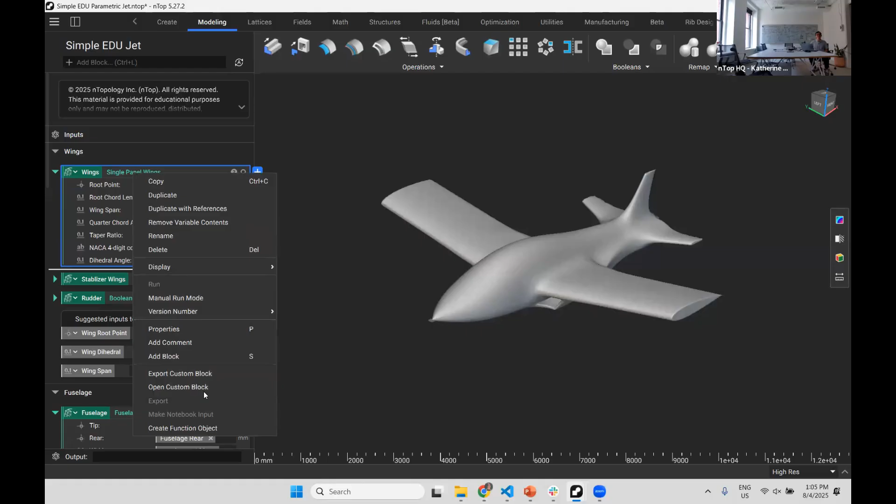So here we can come in and look at the custom block here for how we're generating the wing. You can see we have a bunch of inputs here, and that's similar for our nTop Automate - you can very easily run a design of experiments on this, for example. And we have nested custom blocks. You can see we have a NACA airfoil generator block as well.

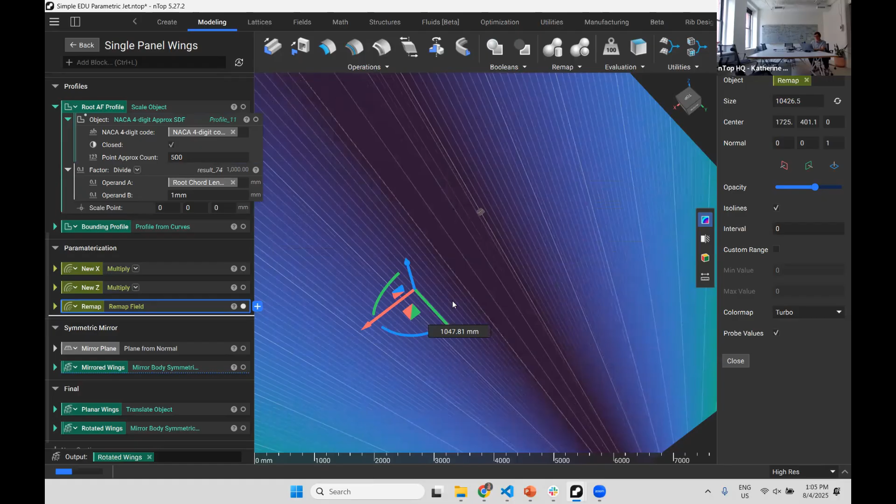It's a custom block, but to generate this airfoil, as I said, we're not just sweeping or lofting along a plane. We have to generate this 2D field. So let me hide the wing. Based on just an input leading edge and trailing edge - this is our bounding box for our wing - what we have to do is make this field that scales proportionally.

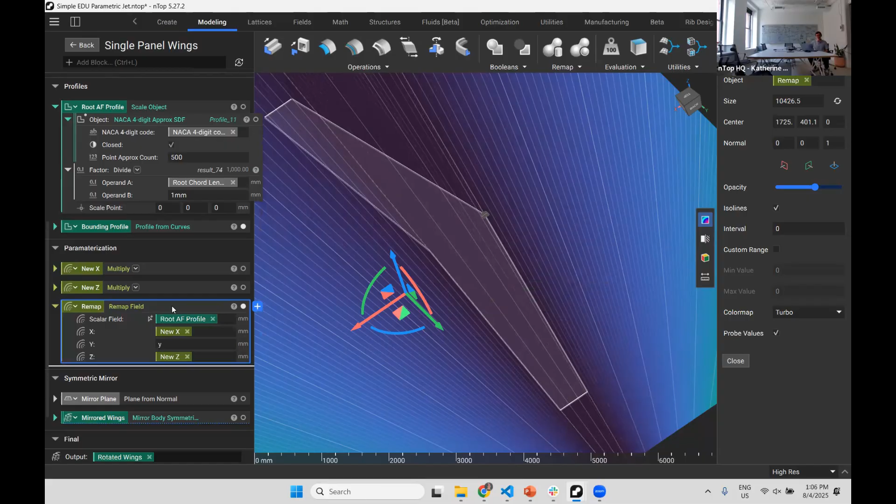You could do this with two plane wings and add twists and all of that, but you have to think about the geometry differently - you have to think about it in terms of fields. So once we have this field, we use the concept of a remap block to take our airfoil. Here's our airfoil, and then we essentially Boolean that with the remapped field to generate the planar wings.

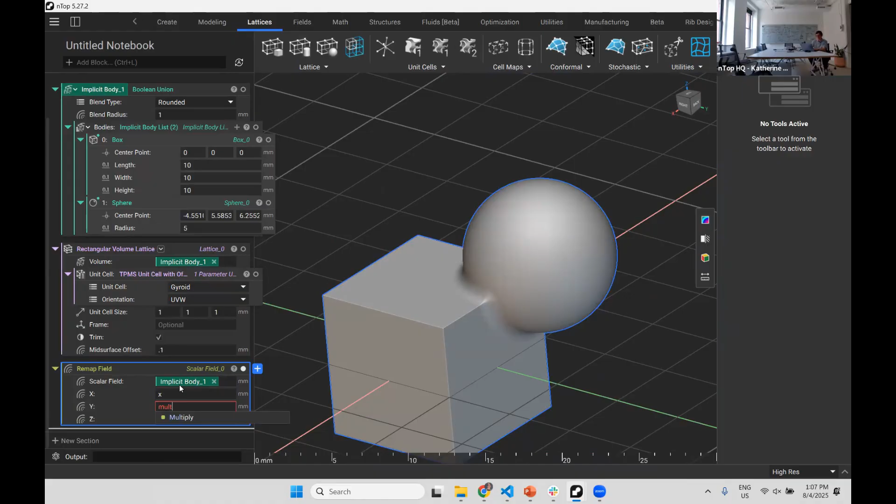So it is a very different approach to creating geometry. To do a very simple example of that remap, here we have our basic sphere cube. If I want to remap this, I'll start with just putting X, Y, and Z in and isolating it - these visibility things. But rather than just doing X, Y, and Z, I can multiply Y by 2 and see that it squishes all of the Y dimensions from the original sphere cube into the Y times 2 field.

So it's a little bit counterintuitive that if you multiply by a smaller number, you're going to expand, but you're mapping the Y coordinates from that initial space into the Y divided by 2 space. That's how you expand it. So all of that is to say, you have to think about geometry a little bit differently. But once you get there, you can see the power that it offers.

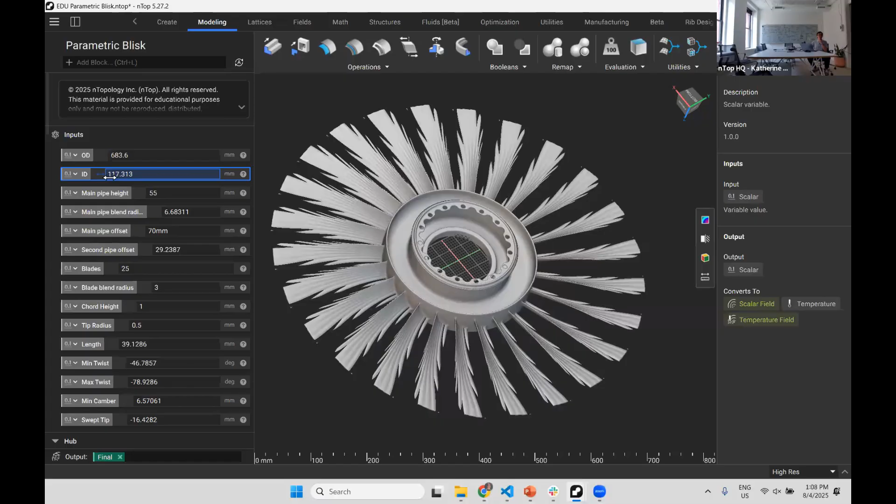So here's that parametric blisk that I showed before. You can see in no other CAD system can you just slide something and have it parametrically update - quick and robust. Similarly, we've discretized the number of mounting holes here, which will always be an integer and be properly spaced based on that inner diameter. But it's all very robust.

And this is all parameterized based on a research paper that one of our product engineers found. So theoretically, you can plug in the physics equations for blisk design, and that can drive the curvature at the root or at the tip. All of that can be your requirements-driven computational model.

I see. And there is another question: does nTop have 3D printing software with which I can set parameters for my 3D printer, like Ultimaker Cura?

Yeah, so I think I mentioned for that, we don't have our own 3D printing software. We do have some slicing capabilities, so you can optimize your design for your specific printer, your nozzle diameter, your layer height, and do your slicing in nTop to make sure it will work. But ultimately, you will need to do that CAM toolpath generation in another slicing software. We have all of the meshing blocks - mesh from implicit body is our most basic one, where you can just generate your mesh and export it.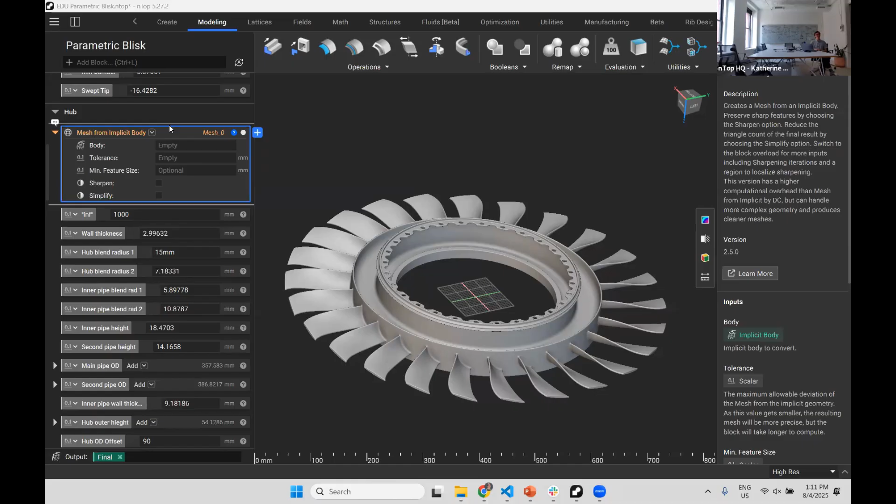Okay, so there was a question about demos or examples. Do you have a set of demos that we may use for familiarization?

So we have a full learning center. learn.ntop.com has a lot of examples there, and support.ntop.com also has a lot of examples. All of our training guides and example workflows typically provide a sample file that you can download and use for any purpose. For example, we just last week wrote a training guide on how to create two body fields to generate a wing.

Another question about IP issues with ntop.org. Yes, that's something we always have to deal with. nTop is also the name of a networking diagnostic tool—we're ntop.com, they're ntop.org. That was part of the issue with lightweighting our name from nTopology to nTop. So no, we don't have any IP issues. We do have an agreement with them so we could use the name, since they existed first. But nTop is our product name, and I think it just has more of a ring to it. Officially we're still nTopology, I believe that's our registered company name.

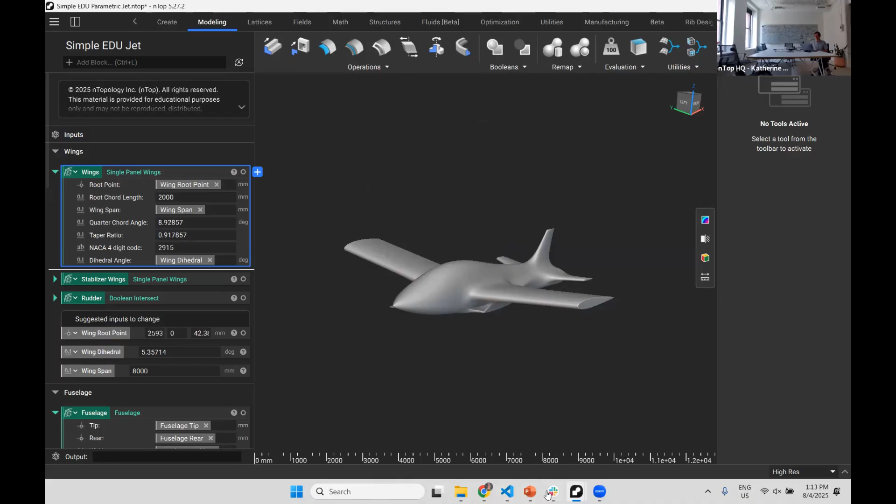But in terms of example files, I'll also mention from our home screen: anytime you open nTop, we have a bunch of examples that show topology optimization, design of experiments, heat exchangers, field-driven lattices, all that kind of stuff. These are often a good place to start, but if there are specific example files you're looking for, that's where I come in—I'm here to help you succeed.

So if you want to bring nTop into your classroom, that's what I'm here for—to help you succeed, help generate example workflows, even help with curriculum development. Happy to explore workshop opportunities so we can get lots of students up to speed quickly, leveraging nTop for conceptual design or any other use case.

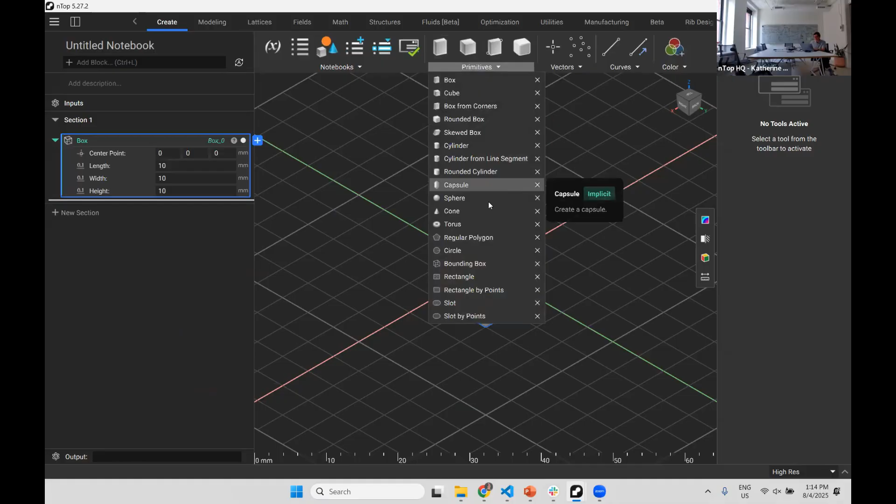I see another question: can I put one figure into another without fillet? Yes, you could do your Boolean union. I'll quickly recreate that sphere cube example. Oopsies. And if we do a Boolean union here, we can specify a blend radius of 0, and that will give a sharp corner. If I look at the field of this part, you can see it is a sharp corner. But you can specify different types of blend radiuses, and that's one of the powers of nTop—a very robust ability to do your unions with a fillet.

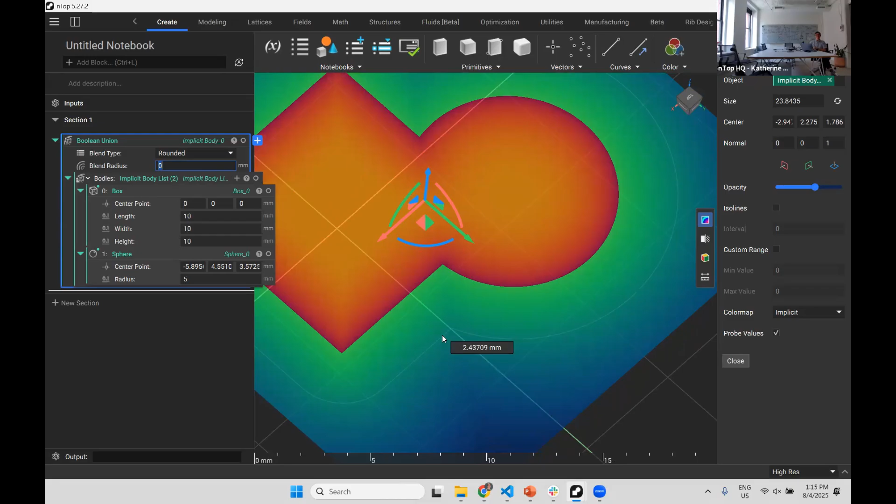I see a question: does your explicit feature let you get a model optimizing from a list of conditions that set different values of load for the model, while aerodynamic performance at high speed and ML finding a better solution? Did I understand that right?

I'm not sure if I fully understand the question, but I think what you're asking about is multidisciplinary optimization. So if you set up your computational model, your nTop notebook, such that you're able to export the different outcomes of your analysis. So for aerodynamic performance, for example, you could theoretically use nTop Fluids. Again, our solver is not currently tuned for external compressible flow, but once it is, you can do that design of experiments to analyze your aerodynamic performance.

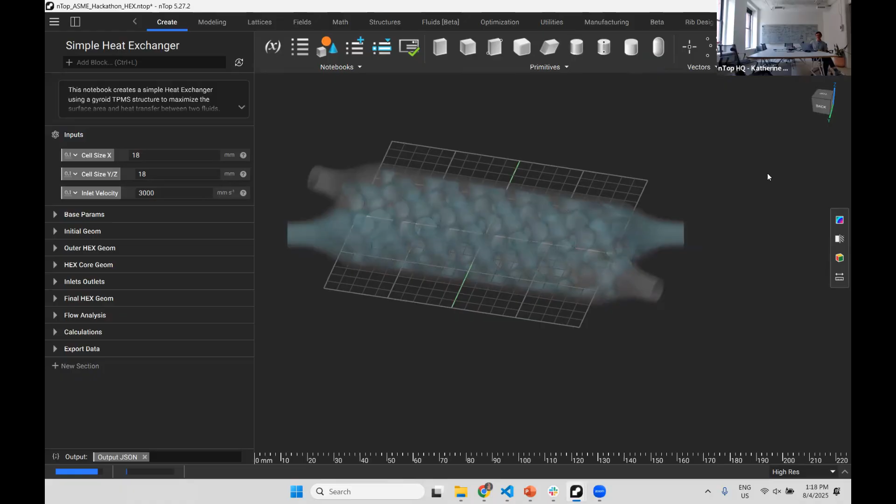So in this case, our input parameters are lattice cell size in the X and Y dimensions, as well as inlet velocity. And you can see this is our flow analysis, it's currently solving. You can get a sense for how long it takes. Obviously, sharing my screen on Zoom takes a little bit of my GPU, so it's not quite as quick as it would be otherwise.

But then once my flow analysis solves, I'm able to extract the mass properties, the surface area, or the mass of the part. But then I'm also able to extract the outlet pressure, inlet pressure, and calculate the pressure drop from inlet to outlet. So that's a key requirement for a lot of heat exchanger designs. And then I'm also able to evaluate the time average velocity across the whole domain. So Lockheed Martin, one of our customers who we've worked with on a similar problem space, wants to make sure that the Reynolds number for the flow inside of a heat exchanger is high enough to make sure that there's enough turbulence to optimize their heat transfer.

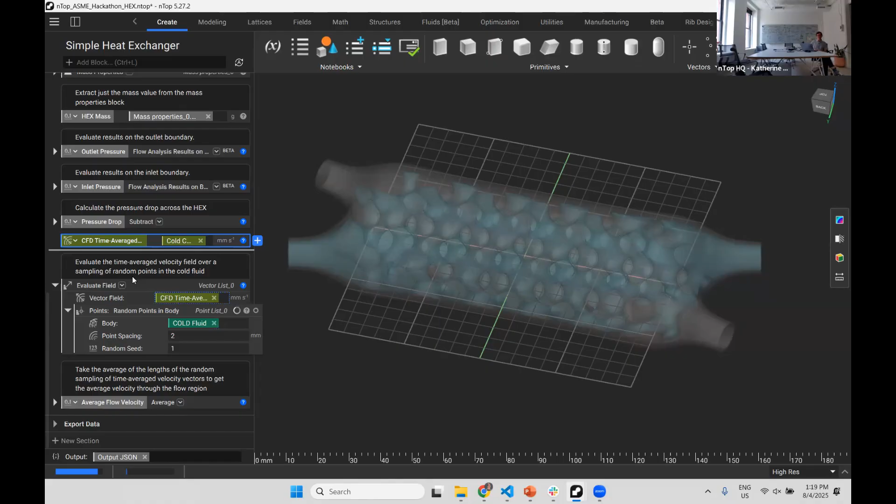So based on all of these outputs, your mass properties, your pressure drop, and your average velocity, you can do that design of experiments. You can iterate over a number of different lattice cell sizes, different inlet velocities, and try to converge on an optimal design given a set of constraints and optimization goals. So in our case, the mass has to be below a certain weight, pressure drop has to be below a certain value, and internal velocity needs to be above a certain value. And then you're optimizing for surface area. You want the most contact between the hot and the cold surface to get as much heat transfer as possible. So by training that machine learning algorithm, they can then do the inverse design to optimize it.

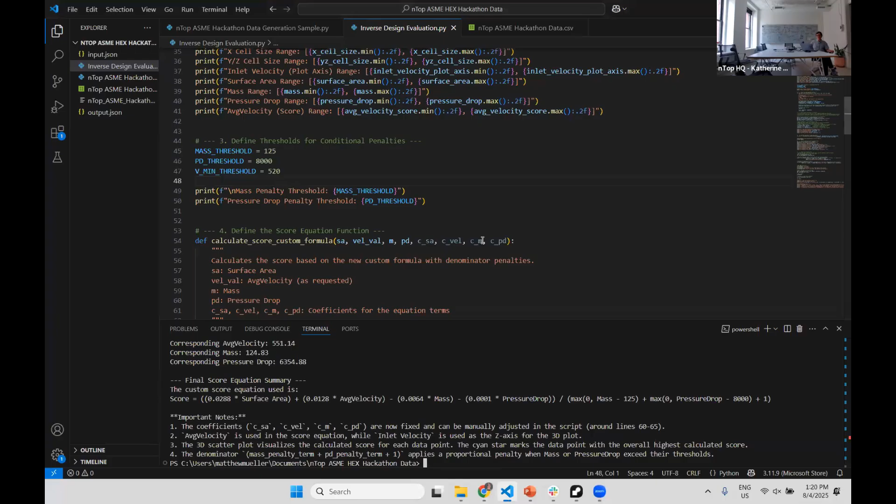And all of that is automated with a simple Python script. So this is the script for generating all of the geometry. It's just nested for loops to run that notebook and then take the output of those simulation results. So it took me, I don't know, 4 or 5 hours to run through these 125 design cases. But then once you train the machine learning model, it should be very quick to get your optimal design or predict your outputs based on a set of inputs. So I was hoping it would be able to solve, but it seems like my GPU is running a little bit slower today. But yes, that type of workflow is something that is core to nTop and what we're able to do.

I see a question from Vadim about whether the nTop geometry kernel operates with voxels. So nTop has our own geometry kernel, actually. We developed something called Sequoia. That's our implicit modeling kernel. We also do use Parasolid. So when you import B-rep CAD geometry, we use Parasolid to interpret those edges and faces.

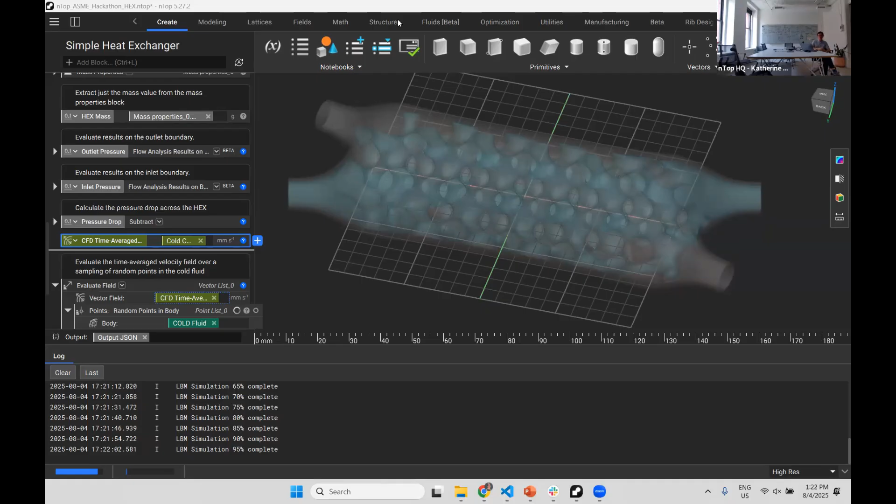But then there are certain aspects of our geometry that are voxelized. So for example, our flow analysis uses voxels to define the flow domain. But the actual geometry does not use voxels, as far as I know. I might be wrong there, but I'm fairly certain that the rendering happens in a different way, and we have different options for rendering. So I'll just quickly mention here that our flow analysis solved, you can see the flow lines, which are pretty neat.

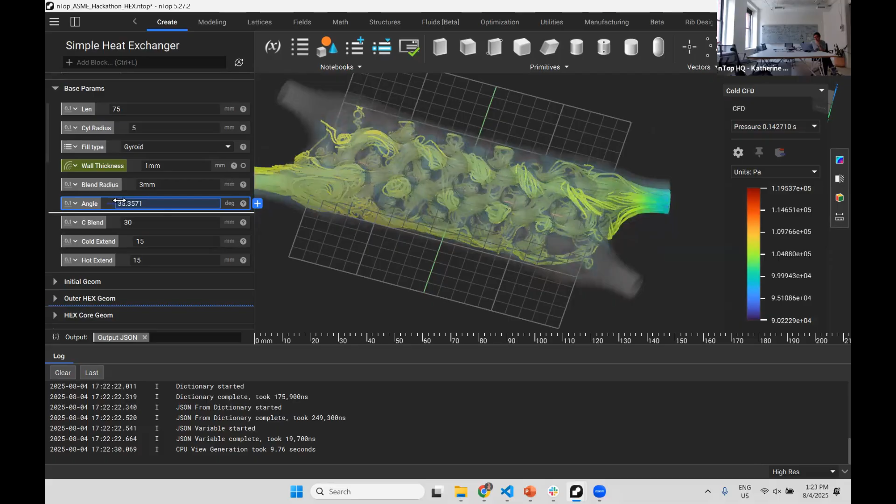And just to highlight the power of nTop, well, my flow analysis obviously is going to stay behind, but being able to adjust this angle and see the gyroid lattice in the center be so robust is again something that no other CAD system can really do.

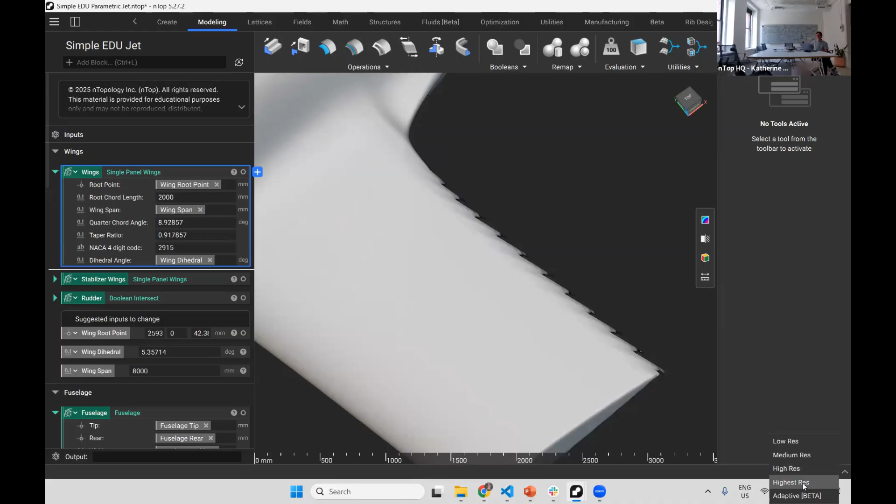But sorry, to mention rendering, you'll notice on the trailing edge here, you see some of that kind of stepping. That is just an artifact of rendering. That is not in the actual geometry itself. So if I bump up my rendering option to adaptive rendering, then we should see a much smoother wing, and depending on how zoomed into the geometry I am, it'll be variable and will adapt to my viewing area to be smoother, but that is not part of our rendering technology.

Cool. Yep, Vadym? Yeah, Katherine, I have a question regarding the surrogate modeling. So you mentioned that you use a machine learning approach. Am I correct that the whole machine learning approach is about defining the surrogate model and then using it in the optimization process? Yes, that is the idea.

You could use the surrogate model both for accelerated evaluation. So rather than running your full CFD, your surrogate model can predict the outcomes. But more typically, that surrogate model can be used for inverse design. So you can run your optimization script with that trained neural network to tell you, given these requirements, these are the optimal input parameters for your design. Yeah, great. I ask this because this is the topic of my research, actually.

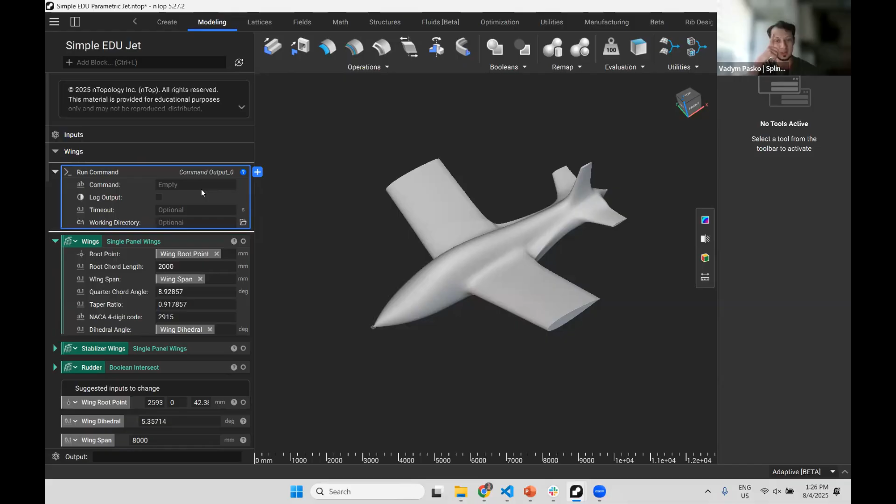And yeah, I would love to explore opportunities to do a hackathon or workshop with students in the fall semester or anything else to help you guys get started. It will be a good chance for our students to familiarize better with your product. Great.

Cool. Well, yeah, thanks again. And let me know how I can help. I guess we have a few meetings and then we may discuss in next steps how to collaborate and obtain extra knowledge about nTop, because it's a real amazing product, and it really simplifies work. And it was a question how much time you may save, and comparatively it's a really huge amount of time.

But what I would like to mention in all these things, you must know the area of your scientific research, because you may simplify it. You would like to simplify by this tool, but it may lead to the wrong way. So you must know what you should obtain. So be very careful with it. But nTop is a powerful tool, and you must have rules how to use it and obtain an opportunity for your research.